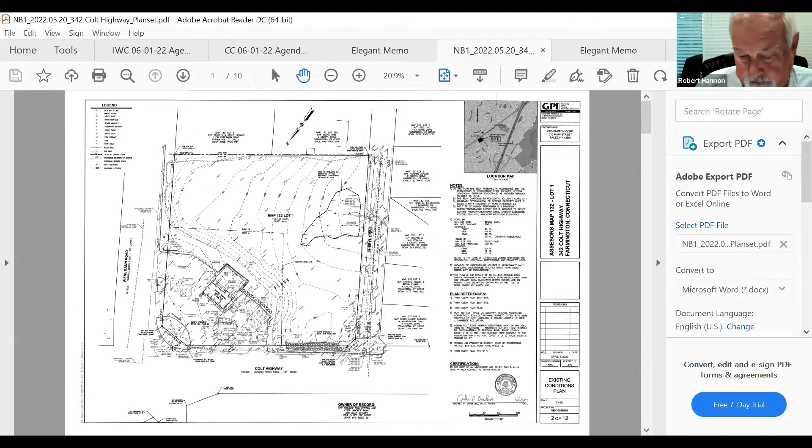All right, thank you. I know the engineer is online. Yep. Good evening, Mr. Chairman, members of the commission. For the record, Chris Tymula. I'm a senior project manager with Greenman-Pedersen, and our offices are at 44 Stiles Road in Salem, New Hampshire. First, I would like to apologize.

My understanding, based on some discussion with the team, was as long as we had everything essentially submitted to the town a week before the meeting, there wouldn't be any issues. The last thing I want to do is present any issues, so I do apologize for any inconvenience. So what I could do is just in general discuss some of the changes to the plans. As I'm sure everyone knows, the last time we were formally before this commission was April 20th.

We had the site walk on the following Saturday, April 30th. Identified some items along Cheryl Drive. Everything was staked out, the retaining wall, the building corners, et cetera. But the changes to the plans I'd like to discuss were really relative to Bruce's review letter, which was dated May 3rd. So if we could go to the grading plan, that gives the most up-to-date changes.

Yeah, thank you. So on this grading plan, first thing, over by the office building, we've added a gated access and gravel driveway to the right of the building. I know we had discussed maybe circumventing around the left-hand side and going around the back. Basically we shifted the retaining wall over about 10 feet, which allowed us to get the gated access in there and provide a 12-foot wide gravel access for maintenance to bioretention number 1.

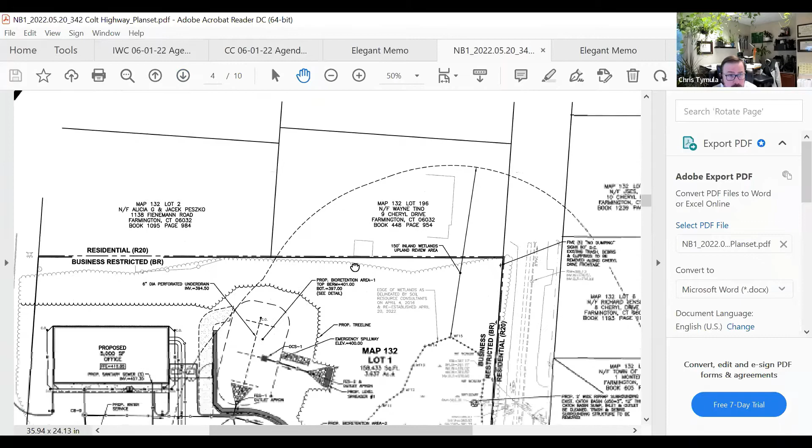We've added some straw wattles and silt fence along the lower development area, which was discussed at the site walk, as well as I believe in Bruce's comments. That would be on the next plan, I believe, the erosion control plan.

Yeah. So basically, go up one more. Right, basically in the middle of the screen, we note proposed sediment control fence and straw wattle. Yep, right there. In addition, based on the site walk, and which is noted on this plan as well as the other plans, in the upper right corner of the lot, we've added a note:

5 no dumping signs, 50 feet on center, along Cheryl Drive; existing trash, debris, clippings to be removed all along Cheryl Drive. So basically, we're calling out 5 signs along that frontage. As everyone's aware, based on the location of the outlet in the existing wetland, there's some trash, debris, sediment collecting in there. So we've shown a 2-foot wide riprap surrounding that catch basin. We've noted that the catch basin inlet, sump, and outlet are to be cleaned, and all the trash, debris, and surrounding sediment to be removed, outside of that catch basin itself.

Additionally, for headwall number 1 and flared end section number 2, there was some discussion on the site of maybe doing some sort of an energy dissipator or level spreader. So we've added level spreaders on both those outlets there. That'll further take the concentrated flow and spread it out and disperse it prior to discharging towards the wetland resource areas.

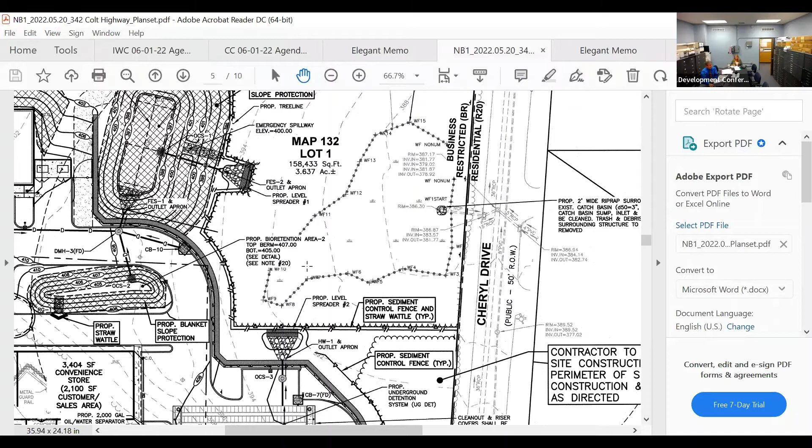Okay, so I guess we'll start. Do any of the commission members have any questions? Bobby? No, I'm fine right now. I'm just digesting everything. Okay, Dave?

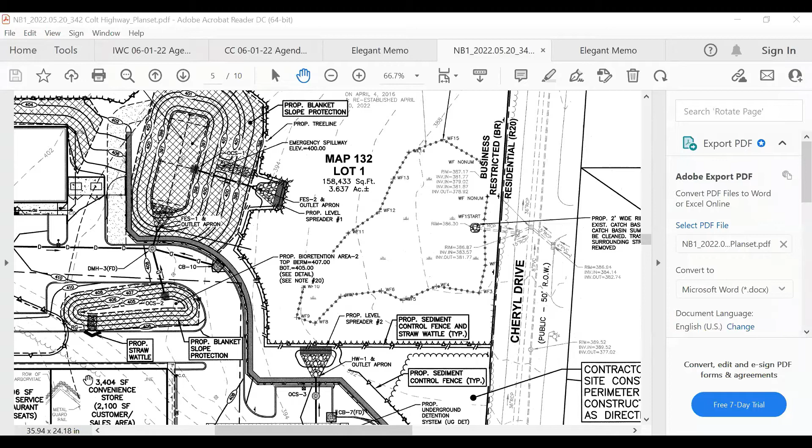Yeah, I had one question. It's actually one of the questions on the engineering review, asking about the feasibility of reusing the sanitary sewer. It was asked to review the feasibility of reusing it, but the response is just that this existing sewer service's condition and size is unknown and cannot be assumed to be reused. So it doesn't seem like any effort was made to actually review the feasibility.

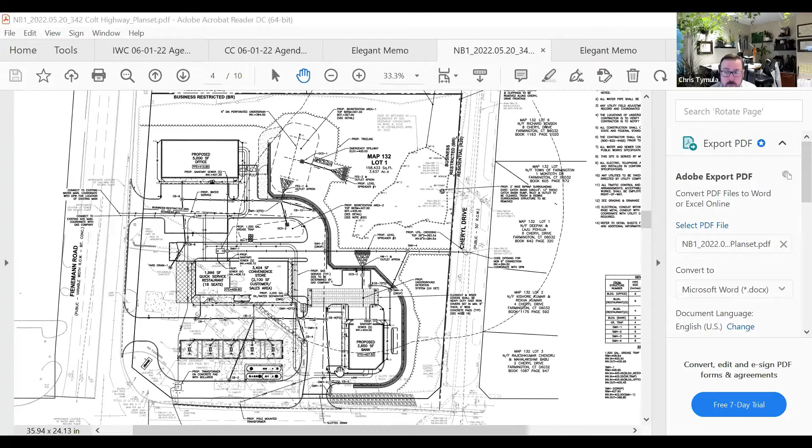Yeah, Mr. Chairman, I can respond to that as best possible. We did look into record plans of where that existing sewer was. We were unable to track any of that down. For the size of the existing facility compared to what we're proposing, the existing line, whether it goes to Cheryl or to Fienemann or somewhere else, is really unknown. So we felt the best approach was, since we need new sewer services for the bank and the office as well, to combine everything with that new line, so there won't be any issues down the road for condition and longevity of that sewer line. So we feel providing a new line rather than trying to reuse the existing line is still the correct approach.

Yeah, Chris, I have those notes. That was going to be part of my discussion, because it does come out of the existing building and run over to Cheryl Drive. So we have all those inspector notes from back then. Okay, sure. If we can have a discussion about that tomorrow or next week, we can look to see what we can do. Definitely. Yeah, that's all I had. Thank you. All right. Thanks, Dave. Robert?

I'll just note for the record that the applicant did a good job addressing all the concerns we raised during the meeting and the site walk: the maintenance and removing the existing debris, the addition of the no dumping signs, the correction of the outfall structure. So I think all of the concerns identified were addressed. The development is all within the upland review area, so it is generally compatible with our standards. Other concerns that may come up with this development likely fall under the Planning and Zoning Commission's purview. End of my comments. All right, thanks, Robert.

Neil? Nothing further to add. Thank you. Mark? No questions. All right, thanks. Ned? Yeah, I was curious about this proposed bioretention area 2.

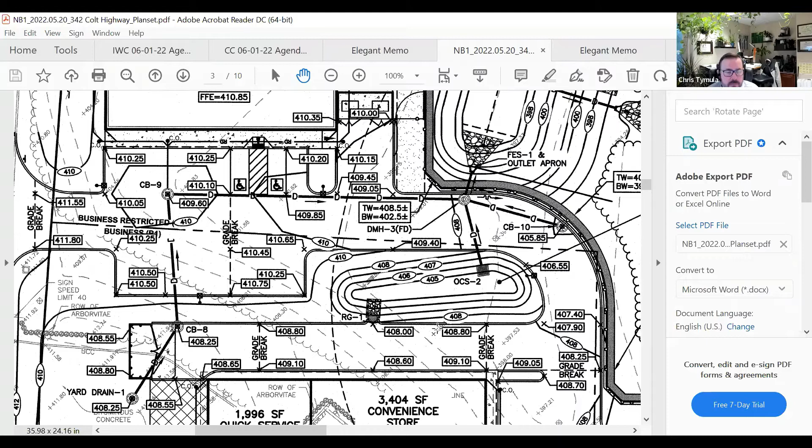Is that, I guess, the purpose of that, if it's going from one retention area to another retention area? Sure, and I can answer. So the intent of that bioretention area was to basically pick up the rear behind the convenience store, provide an additional level of treatment on site. The fact that it's basically discharging from one bioretention to the next bioretention, we do that fairly routinely. There will be a long-term operation and maintenance plan to make sure that the basin is cleaned frequently, making sure that there is no trash, no debris collecting in there. It is just essentially a shallow depression back there. So maintaining it and making sure that the litter and debris doesn't collect there really should not be an issue. Okay.

And then where are all the roof drains going on this? Yeah. So for the convenience store, all of the roof drains are draining to the front of the site, being collected in catch basin number 3. And then that ultimately goes to the underground stormwater system that is up. Yeah, correct. Right in there. Same thing for the bank. Everything for the bank is collecting into that same underground detention system. It's a watertight pipe system. So it'll basically hold the water and then discharge it out through the outlet control structure, and then the previously mentioned head wall number 1, which is slightly rotated.

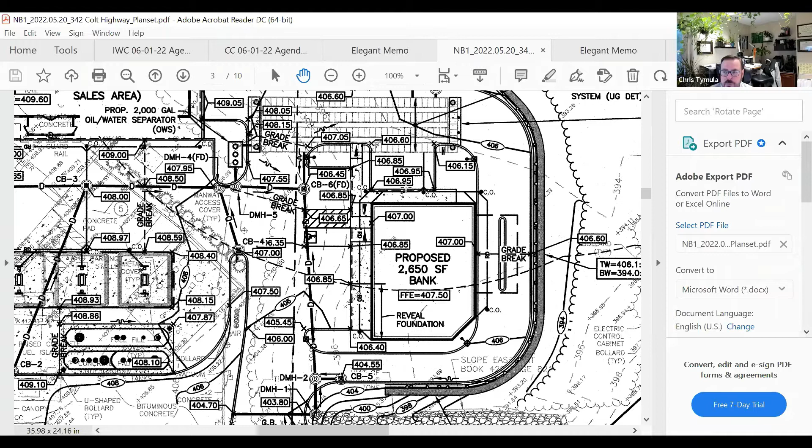And then the same thing for the office building. The office building will ultimately drain into catch basin number 9, which is located on the upper left-hand side. Okay, keep going. Yeah, no, hold on. This thing's giving me problems here. No problem. The pen is having problems, so I do it manually. There you go. So catch basin number 9 is right there, just located below the hand. That'll discharge into the bioretention number 1 as well. Okay. That's all I have.

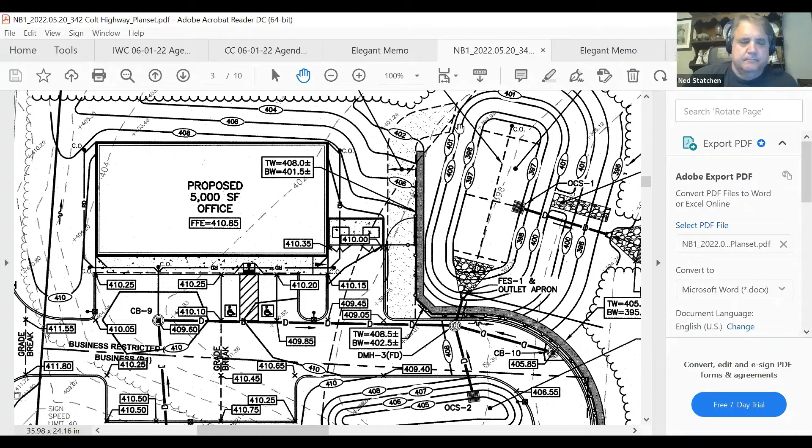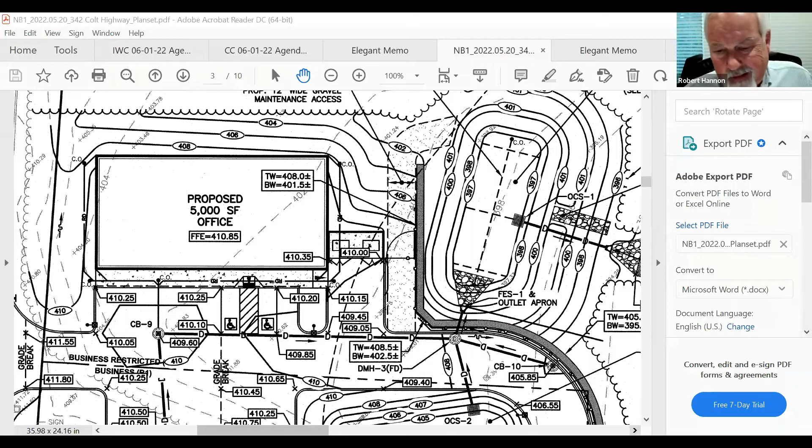Thank you. Thanks, Ned. I've got a couple questions to follow up with what Ned was talking about here. The drainage system going into basin number 1, is there anything special about that manhole? I mean, you've got some other equipment elsewhere, but I'm just wondering, is this a catch basin with the hood? I mean, what is it? Because I would think that because of a lot of the storm drainage coming in from the roadway over there, we might want to have something a little more effective as it relates to runoff from cars, things of that nature. So can you explain what you're proposing right there before it gets into basin number one? So catch basin number one or the bioretention area? No, bioretention basin number one. Sure.

So from a roadway point of view, none of the roadway system is getting into our drainage system. We basically created a high point at the property line to make sure that no roadway drainage goes into our site. The remainder of the driveway and the roofs for the office building, that's all going through deep sump hooded catch basins, First Defense hydrodynamic separators to make sure that all the oils and sediment are collected in there prior to discharging into the above ground bioretention basin. And then the bioretention area provides treatment, and then ultimately discharges out through the flared end and then the level spreader prior to getting to the wetlands.

So in that area, is there a hydrodynamic separator proposed there? There is. So DMH number 3, which is located right there. Yep. So if you look a little down to the left, it says DMH 3 and then FD. So the FD stands for First Defense. And then in our drainage structure table, we do denote that FD stands for a First Defense hydrodynamic separator or approved equal. Thank you. I appreciate that. Sure. In terms of the level spreader, you've got the design laid out for that on the plans? Yep. So we've added additional spot shots.

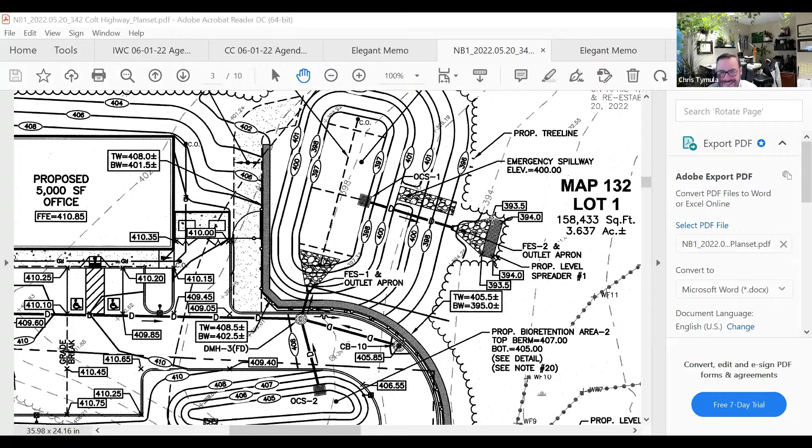Yeah, again, it's an issue that's come up with other meetings I've been involved in, so I just want to make sure that that's something that we address. Sure, and if you have no issue, I can work with Bruce and see what some other applicants have proposed in lieu. I didn't necessarily say it was specifically with wetlands, so. But yeah, no, that would be good.

And then Bruce, if you can go a little bit towards the right, I've got a question about the riprap design that's being proposed, like the 2-foot riprap around the pipe that's there. So my question really is, in terms of going out and double checking the site from a maintenance perspective, is this also picked up in any type of maintenance plan, and how often would that be done?

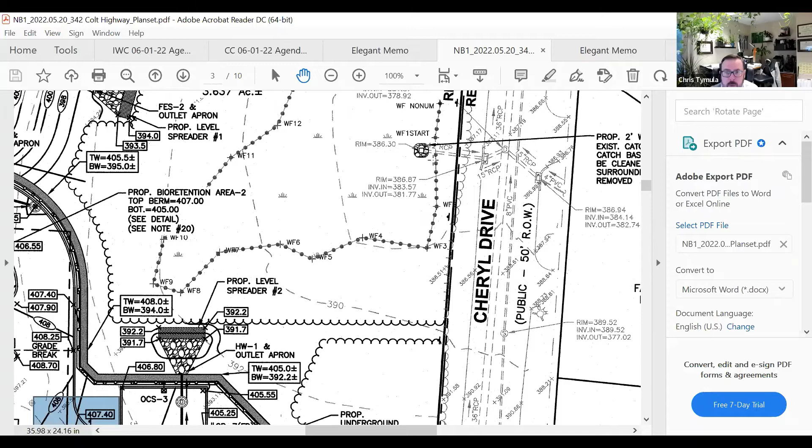Yeah, so specific to this catch basin, no, but we can definitely add specifics to the O&M to make sure that it is looked at. It could be generally looked at no different than a catch basin or an outlet control structure on site. We could just make sure that the O&M specifically talks about the catch basin outlet that's at Cheryl Drive, within the wetland system. It's sort of isolated from the rest of the site. Correct. So I just want to make sure it doesn't get lost in the shuffle.

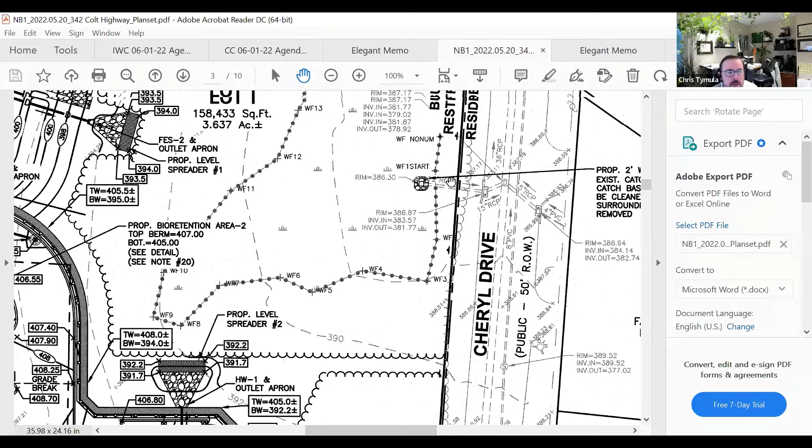And is that the only work that you need to do within the wetland area? Yeah, so basically get rid of some of the debris and trash that was surrounding that catch basin, clean that catch basin as well as the other catch basin that's in Cheryl Drive, making sure that the pipe is cleaned out. And then cleaning up the area along the lot line, making sure that the grass clippings and other garbage are cleaned up.

And the piping that's there is in good condition, so no work needs to be done there? It did not appear like that based on what I saw in the field. Okay. Once we get that cleaned out, we can make another determination at that point, because it's hard to see on this side. You couldn't even see the pipe. It was so plugged. Correct.

And then Bruce, if you can go to the area dealing with the underground infiltration. I'm assuming that there are some details in terms of the clean out, how frequently that would be looked at. Yep. And that's part of the O&M as well. Okay. And Chair, just so you know, this isn't underground infiltration, this is underground detention, because of the fuel. Chris and I had said that this should not be infiltration at this point, this should just be storage. So it's storage, and then it's slowly metered out through the pipe system.

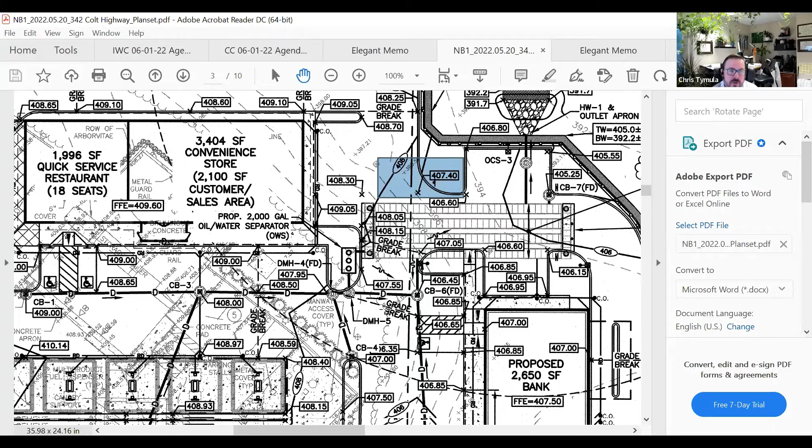Okay. And it should be noted as well that typically, for gas station developments, we try to go above and beyond, and we do specify that the pipes are watertight pipes and they meet a certain ASTM standard for water tightness. So in the event that there is a spill, which is obviously unlikely, we do have catch basins and oil water separators and all that. It just provides another level of protection to the surrounding areas by calling out the watertight pipes and joints.

Okay, no, I thank you. Those were sort of the questions that I had. Bruce, let me ask you, what's the status of the review? I'm going through the storm drainage now, so I'm almost through with the storm drainage. I've done the plans, I've marked them up, so I hopefully should be able to get this wrapped up tomorrow.

And then my plan was to talk to Chris verbally, work this stuff out so we don't have to go back and forth, and then hopefully get these items addressed or just noted on the plans as comments for condition of approval. Okay. I mean, like I said, my personal take is I would prefer to hold off until the next meeting because I know we've got until the 15th to do something, but I'd like you to have a chance to finish the review.

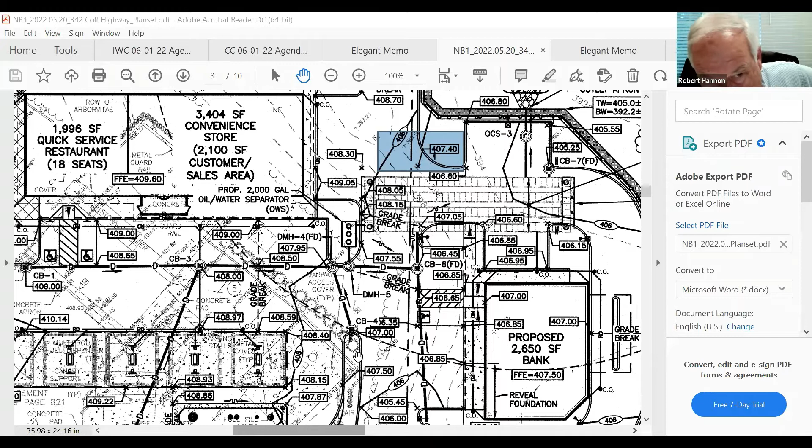If anybody else needs to chime in, if they have any comments or whatever, and give you a chance to talk to the applicant, and try to make sure that everybody's happy with what's going forward. That would be my take, but I'll open it up to other commission members to see what they think. If you feel as though we can vote on it now, that's fine. I'm just one vote. So Ned, I'll start with you.

No, I think it's reasonable. The town has to have time to review these things and work out any changes or improvements. And so I think to wait one meeting would be prudent.

I had a question on that catch basin that we were just talking about. If I remember right, that was very full, but then when we went to the catch basin on Cheryl Drive, we could see the pipe that was draining into it. So there was some moving water there, wasn't there? Correct. Yeah, it was flowing. It's plugged, but there's water seeping through. Okay. So the pipe's not completely plugged, but that catch basin, I'm sure once we get the catch basin cleared out, it'll be a big improvement. Yep. Okay, thank you.

All right. Thanks, Ned. Mark? I think we should wait until we get all the information. Thank you. Neil? Yeah, I agree. Let Bruce and staff finish their work and bring it back in a couple of weeks. Okay, thanks. Robert? I concur. The applicant didn't express that it would be a hardship if we didn't act for 2 more weeks. So I'd like to give the staff the time to review and make sure that everything is set. So I prefer to table. Okay, thanks. Dave? I'd agree with that as well. Okay, Bobby? Yeah, same here.

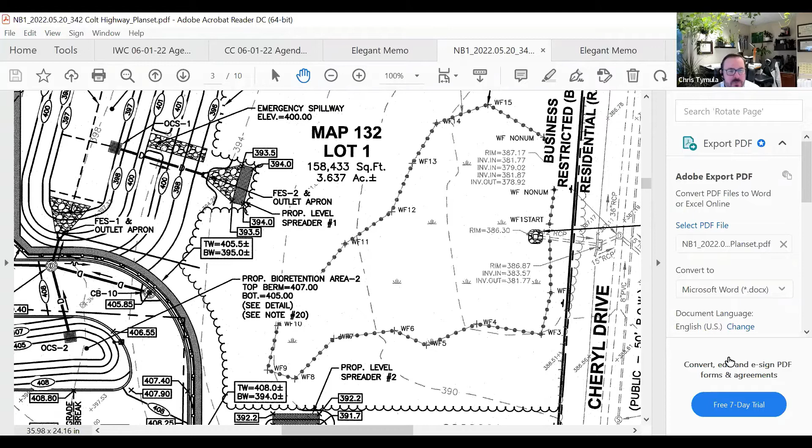Sure, and I guess the only thing I ask, Mr. Chairman, is I do have another meeting. The way it's working right now, it's every 2 weeks with this commission, every 4 weeks with another commission, and they land on the same day. So if I call in, I may be calling in with no video, on the road, from my other meeting. And that's no problem whatsoever as far as I'm concerned.

Okay. Again, we're just trying to make sure that the town has a chance to look at the changes. Everybody's happy with what's going on. If there's some issues the town has, it gives you an opportunity to try to figure out how to deal with it. And it just makes everybody's life a little bit easier. But if you've got to call in with no video, that's fine. So no, duly noted. I just want to let the commission be aware of that. That's all. Appreciate it. Bruce, did you have something? Nope, I'm good. Okay. All right.

So my only other question. So discuss possible enhancing of the level spreader outlet for scouring possibilities, and then making sure that we add the wetland catch basin to the O&M. Was there another item that you mentioned, Mr. Chairman?

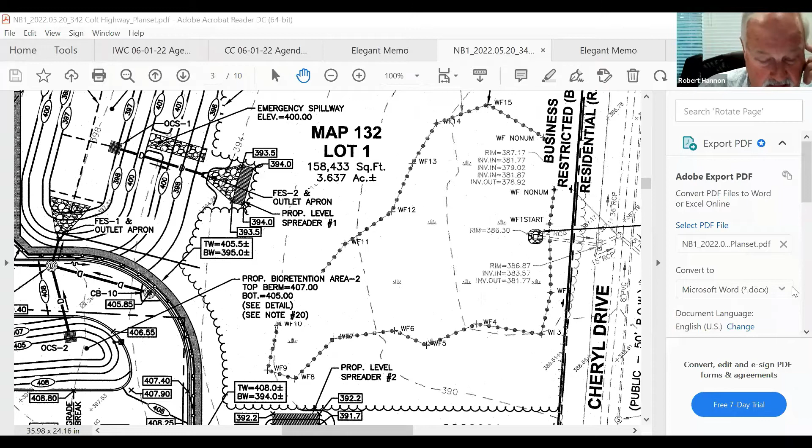No, you answered the other ones. I was wondering whether or not you had some of the hydrodynamic separators, especially over at Basin 1, and you said you did. So okay, that answers that. Oh well, the other one was maintenance in terms of the detention. Sure, yeah, that would be part of the O&M. Okay, that was what I had. All right, great, thank you.

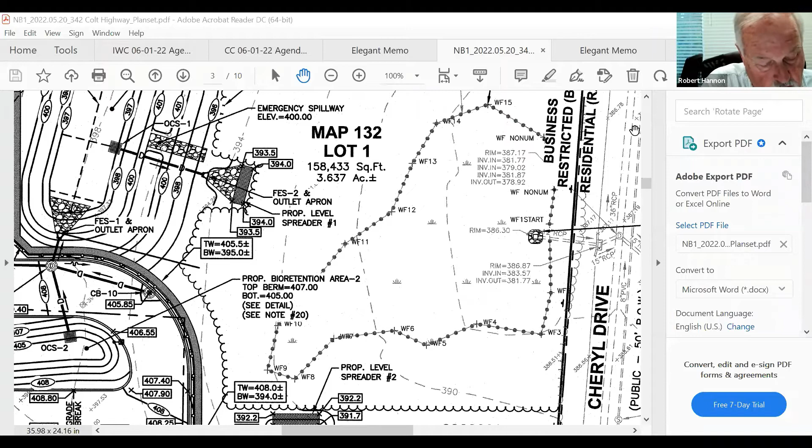Next up is Honeyman Builders LLC, 17 Burlington Road. We have the engineer online for that, just give me a minute. I've been having problems. We can't load everything at once, so I've been taking it a little slow. Give me 1 second. Here's the highlighted plan.

Dave, are you on? I am. Can you hear me? We can hear you. Loud and clear. Do you want me to jump into it, Bruce? Yeah, just take it from here and give a quick brief, because there were probably a couple people that were not on, and then bring it up to date with the changes and responses from the last meeting. Okay, thank you.

For the record, Dave Whitney, professional engineer representing Honeyman Builders. Mike Honeyman is also on this call if you have any questions for him. This property is 2.16 acres in the R20 zone on the south side of Burlington Road. As we discussed last time, the eastern 40% of the lot is wetlands, and there is a watercourse that meanders off the property, then back onto it, and then crosses under Burlington Road and flows to the north.

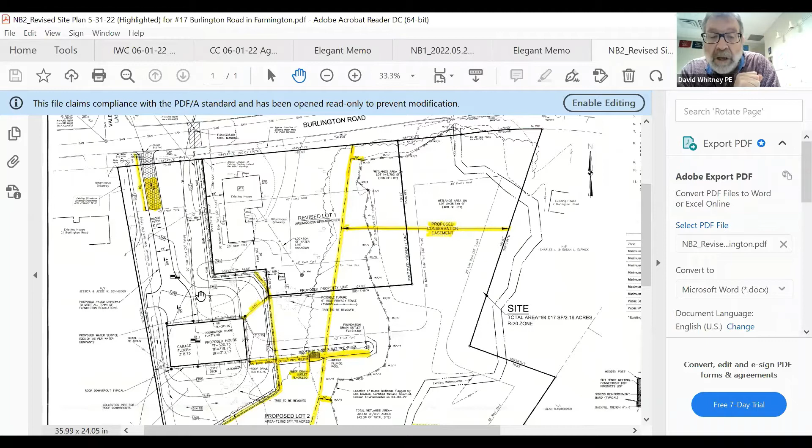There's an existing house and an existing driveway on the property. The project is basically a 2-lot re-subdivision to create one new single-family house, located right where Bruce has the cursor, somewhat behind the existing house. The existing house is connected to the sewer, and so will the proposed house. Public water is available, so there's no septic system. We've located the proposed house as far to the west, away from the wetlands, as possible.

There is a wood line that runs through the site, and our goal was to put the house in the open yard area so that very few trees would have to be cut down. There are two large specimen trees of questionable health that may or may not remain. Otherwise, no trees will be cut down as part of this two-lot re-subdivision. The roof water and the foundation drain outlet pipe will discharge easterly to the wetlands, right where Bruce has the cursor.

On the plan in front of you, the revisions from the last meeting based on the commission's feedback are highlighted in yellow. There are two outlet pipes. One is the foundation drain outlet pipe, with a very low flow. The other is from the roof drains. We originally had both outlets fairly close to the wetlands, but at the commission's request we pulled the roof drain outlet about 50 feet back. There'll still be a plunge pool and level spreader at the outlet, but it's about 50 feet from the wetlands now.

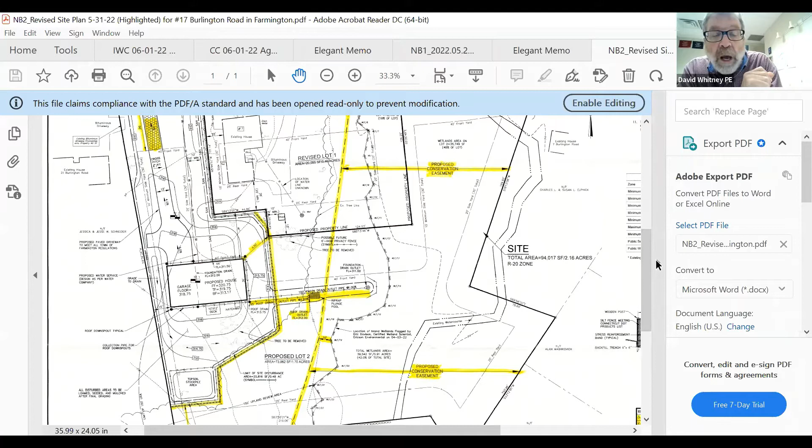Another revision: Bruce met with Mike Honeyman at the site recently, and they agreed upon the limits of a conservation easement, which runs through the site. Bruce has the cursor on it. This line has been established anywhere from 10 to 20 feet from the wetlands boundary and will protect the eastern portion of the site. We also added a second row of straw wattle to back up the silt fence at the limits of disturbance.

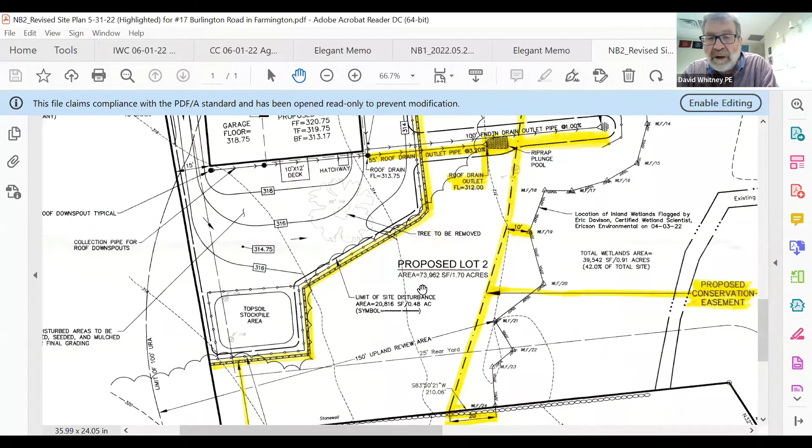Again, we tried to keep the disturbance as much as possible away from the wetlands. The driveway itself and related grading will be outside of the 150-foot upland review area, but the house itself and the grading around the house will be within the upland review area, but as far away as we could make it. The closest point of disturbance from the house and grading is 50 feet to the wetlands, right at the back left-hand corner of the house.

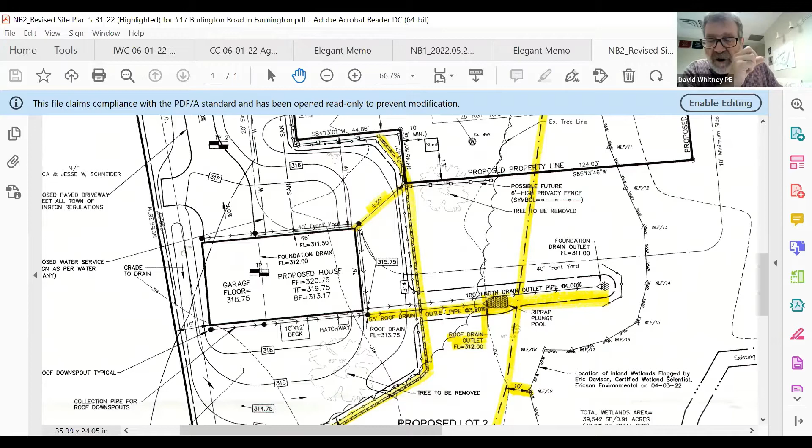The house itself is about 80 feet away at the closest point. The limit of disturbance is about 50 feet. So we made every effort to maintain the existing wooded buffer that is there. I enlarged the anti-tracking pad at the driveway entrance from 25 feet to 50 feet as Bruce requested.

I made a couple changes to a couple of numbers in the zoning data table. This plan went through a couple iterations. So the zoning data table, which is kind of a planning and zoning issue, now reflects the current surveyor's plan and the current site plan. I think that's basically it in terms of the changes. I'd be happy to answer any questions. Just so the commission knows, if this is approved, the next step is to go to TPZ for subdivision approval.

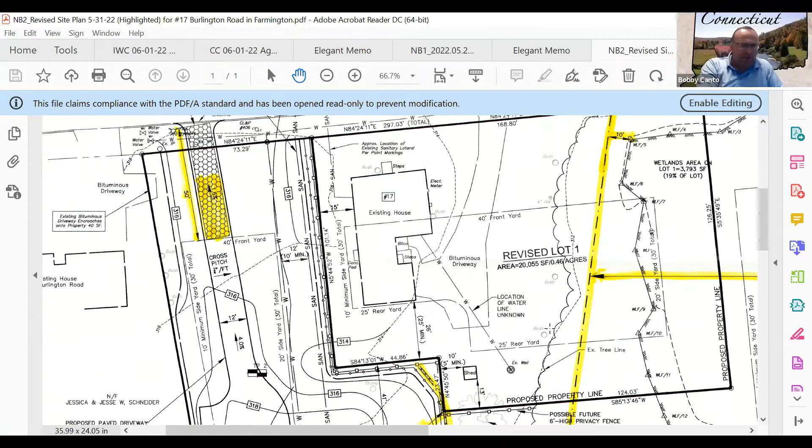Thanks, Bruce. Bobby, I'll start with you. Any questions, comments? So if I get this straight, they're putting two houses on, so it's gonna be two lots. Is it a common shared driveway? There's an existing house with its own driveway currently on the property at the front of the property. And you can see the proposed property line is sort of a rectangle around it. There is a bit of a jog, but that is the existing house lot.

So the remaining land, which will be 1.7 acres, about 5 times the minimum required, will be one new lot with one new house. And it'll have its own driveway, and the driveway itself is outside of the upland review area. Runoff from the driveway will flow across the grass and the open space, and eventually down through the woods and into the wetlands. But we've kept the driveway a fairly good distance away from the wetlands.

So the only thing going out of that rain leader is going to be the gutters from the house? Right, the gutters from the roof of the house and the foundation drain outlet pipe. We dug some test pits on the site, and there is a high seasonal water table down 3 or 4 feet. So that's the reason we're keeping the house up, because we want to avoid at all costs a wet basement. So there will be a foundation drain around the exterior of the footings, as is typical. And that pipe will outlet in an easterly direction towards the wetlands. Typically, very little flow comes out of a foundation drain outlet pipe.

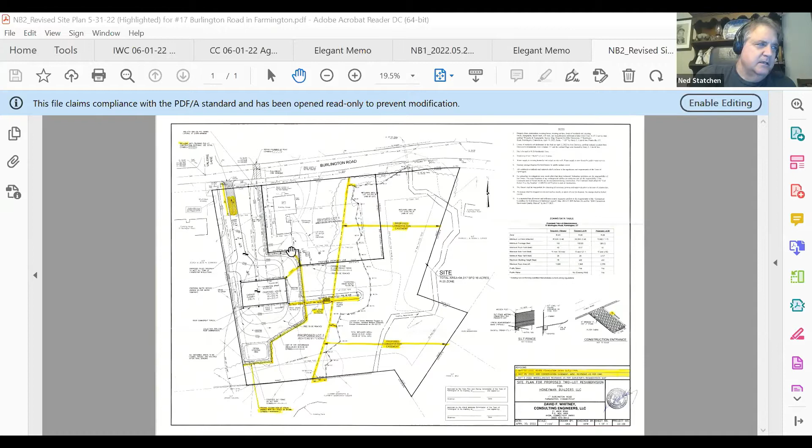Yeah, I'm definitely happy to see that the drainage moved farther away from the wetland. And I'm just curious, is part of the reason for this shape so the new house can have the required frontage? I can explain the jog in the rectangle, if that's your question. It does not have anything to do with frontage. It has to do with the desired location for the proposed house. We didn't want to cut down any trees, at least in the woods, but we wanted a decent backyard for the house.

And also, when we were on the site, it just seemed like the right spot for the house. So because there is a shed there in the back that we want to keep with the existing house, we came up with this configuration. The front of the new house has to be 40 feet back from the back property line of the existing house lot. And if we squared off the rectangle, which we could have done, that would push the house another 20 or so feet back, and it would have been very close to the wood line and also closer to the offsite pond that is to the south.

You can just see there's an existing pond off the property. So our thought was to not have the house any farther back than it had to be, so that we could stay as far away from the pond and the wetlands, and we could have a decent backyard without having to cut down any trees, and it just looked right on the lot where the house really wanted to be. So yes, it does make a slightly odd lot configuration, but you don't really see that when you're looking at the site. So anyway, that was our thought process.

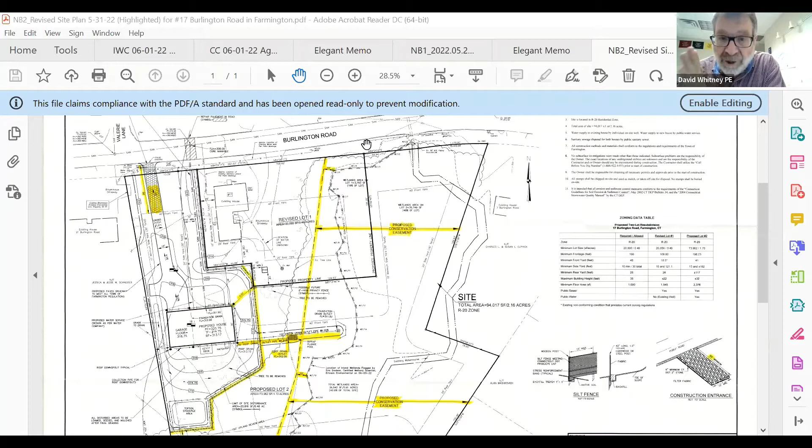Well, we didn't have 100 feet of frontage along Burlington Road where the proposed driveway is. So the minimum frontage is met on the eastern portion of lot 2, right where Bruce has the cursor. But we didn't want to bring the driveway in there. We could have moved the existing house lot all the way over and brought the new driveway in right next to the existing driveway, between the existing driveway and the wetlands. There was room to do that.

But it was thought that we could keep the driveway far from the wetlands, because I guess the dirtiest runoff is from roads and driveways. We thought if we could put the driveway on the west side and get our frontage on the right side, it does make for a lot that kind of looks like a ninja weapon, but it meets the zoning regulations, and I think accomplishes what we wanted to do, and that's keep everything as far from the wetlands as possible. Yes, I agree. I think that's a good idea. And I kind of had a feeling that you needed it to make up the frontage, but I wasn't sure.

And so now on the proposed conservation easement, is there going to be a marking in the fields for that? Are we going to require that? Yeah, we have our posts with the blue sign discs. The reason for the applicant and myself going out there was I wanted to confirm that this was a treed area. I wanted to make sure there were adequate trees in there and that we weren't just doing something where, if this does get cut, it would be open area to the wetland.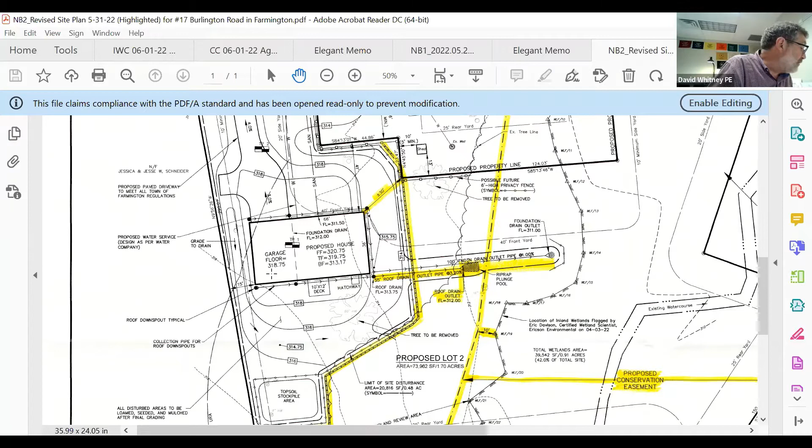As I said before, we conducted a couple of test pits, and the groundwater table is down 3 to 4 feet. So the basement floor, for example, is basically just about 1 foot in the ground at the eastern end of the house, and maybe 3 feet in the ground on the western end, and we're filling around the house. So we've kept the house up to stay out of the groundwater table. Also, hopefully, if this gets approved, construction will occur in the summer and fall and not during the seasonal wet time.

Okay, so is there an outside chance that when you're going in and putting in the footings you could possibly run into some groundwater? I guess what I'm looking at is, if that did in fact happen, even though it may be sort of a remote chance, is there something that can be done on the plan to at least identify, if you do run into that situation, how that water would be handled? If it's got to be pumped out in order to support the concrete footings?

Well, I think it's an unlikely event, but you can never say never. So we could construct a temporary sedimentation basin in the backyard and dewater the house. Again, we went to a lot of trouble to make sure that we're not going to be in the groundwater table. We didn't want to rely on a pump to keep the basement dry. I know theoretically that'll work, but that's not the best plan. So we started with the elevation of the basement and then went up from there.

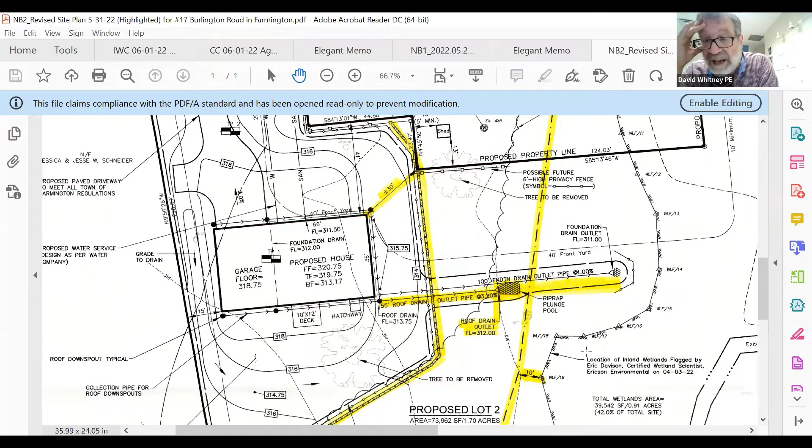So let me just double check. One nice thing, if I can just interrupt, one nice thing about this site is the grades are relatively flat. Sure. So you're not going to have much velocity from stormwater runoff. I think it's a great site for sedimentation and erosion control measures to work properly, of course, if they're properly installed. So we have that in our favor. Plus, as I said, the soils in the area of the house are well drained. So it's not a wet lot at all, at least on the western side.

All right. And then Bruce, a quick question for you. The way this is laid out, with the foundation drain going into the conservation easement area, we just need to make sure that the conservation easement is set up to allow the homeowner to be able to go in and do maintenance in that area, should it be required? Yep, that's required. Okay.

We did that on another subdivision. What we do is we work with the builder. We make sure that, look, we don't want to cut any trees in this conservation easement, so we just locate the foundation drain in an area that's not going to affect any trees. So hopefully, if they do have to maintain anything in the future, there won't be any trees they have to cut. Yeah, so I just want somebody to make sure they look at that, so that assuming this goes forward, the homeowner actually has the ability to go in and do some work there should they need to. Okay. Yep.

The only thing I have for you, one more thing, would be on the voting. Everybody was here last week with the exception of Commissioner Canto. So as long as he's reviewed everything from the last meeting and he confirms that, then he should be eligible to vote.

Okay, so Bobby, I'll ask you, how do you feel about it? Yeah, I'm not seeing a problem after reviewing it. I had the same problem with the foundation drain going so far in, but it seems like it's being addressed, so we should be good. Okay, and you're familiar with the material that you feel like you can vote on it? Yes. Okay, good. Just want that on the record, that's all.

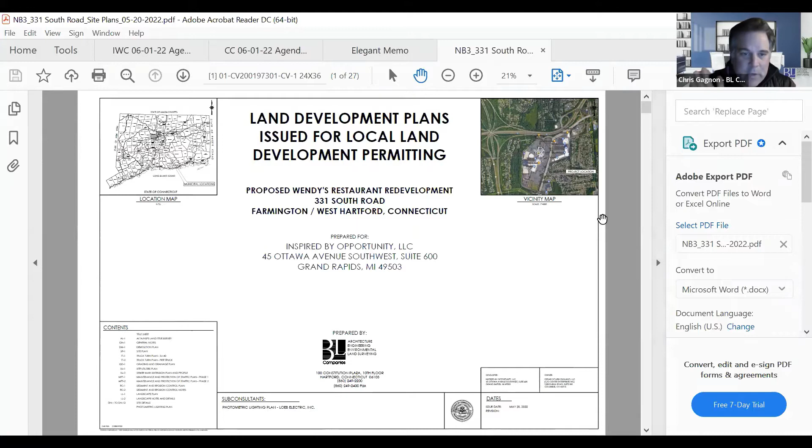Hello, everybody. My name is Chris Gagnon. I'm a professional engineer with BL Companies here representing this project for you today on 331 South Road. It's my understanding that there's been some preliminary application meetings with everyone, but I think this is the first somewhat formal presentation to you folks. So I will run through it, and certainly feel free to jump in and ask any questions. The interesting part about this project is that the property is located both in Farmington and in West Hartford. So we have two parcels, one property, if that makes sense to you.

So obviously we're in front of you folks today because there is a wetland area that is located off-site to the west of our property, right around there, that we have mapped out based on the town mapping that you have. We did not actually delineate it as it's off of our site, so we don't have permission to access that, but we have proceeded accordingly, assuming that wetlands is there, and that is why we are in front of you today.

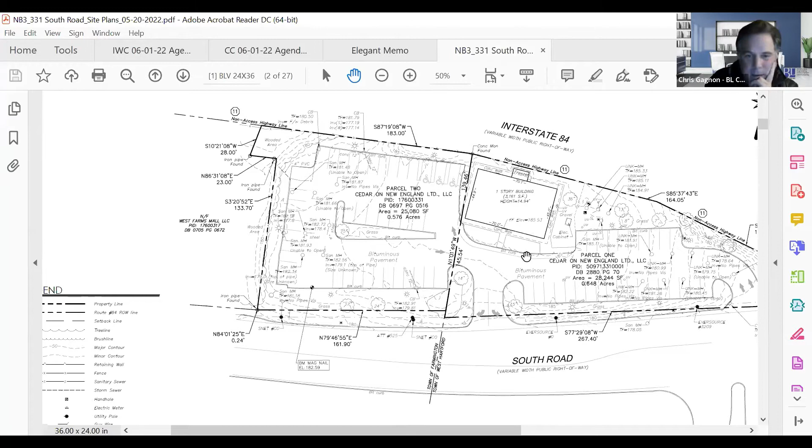So the plan here is we're going to take the existing building and, maybe can you click over to the site plan? Oops. Is that the plan you have? Yeah, no, that's fine. There we go. Beautiful. Thank you so much.

So I'll talk in general about what's happening, and then we'll get into the potential impacts and how we're mitigating them. So what we're trying to do here is we're going to demolish the existing building, and the plan is to install a proposed new restaurant, same tenant, but with a drive-through. There's not an existing drive-through on the existing project. So the plan is to demolish the building and build a new one. As we all know, drive-through is, I guess it's always been popular, but couldn't be more popular now.

The intent is to continue to use the same entry drive that we are using. This is a one-way flow situation, so it's one way in and one way out. We're maintaining the entrance location as it lines up well with the intersection across the street. So we're maintaining that, but we are proposing to relocate the exit westerly. It just allows for better flow for the drive-through, for the delivery vehicles, and for the fire vehicles. So that's kind of the site plan overview.

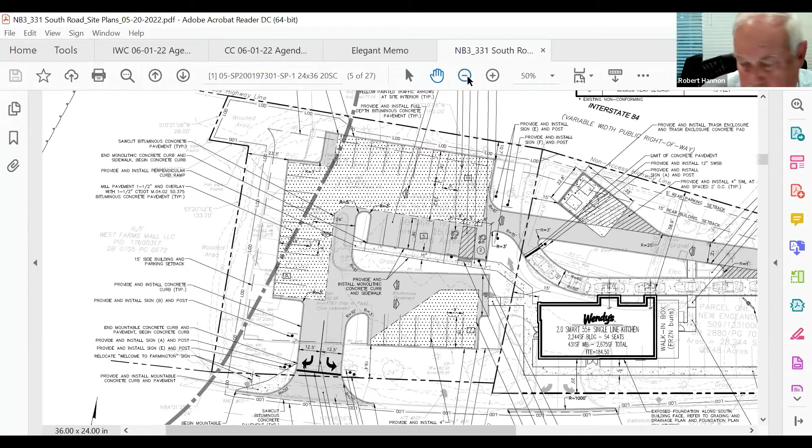So I guess before we go any further, any questions on the site plan, or happy to just save them for the end? Probably just save everything till the end. Thank you. Yep, understood. If you wouldn't mind then clicking over to the drainage plan. Let's see, what is that? Truck turn. Yep, don't need to do that. There we go. Perfect. And you could zoom in on that similar spot over there.

So somewhat of a theme of my presentation will be my opinion that these proposed improvements will actually be a benefit to the resource area off-site. So currently the stormwater is collected in a very simple catch basin and pipe system and is discharged at this same location. So our proposed development does not change the discharge location in any way. However, I believe it is an improved discharge in that we are proposing a hydrodynamic separator, which is that little circle. There you go. Which does provide the required TSS removal, and we're also installing deep sump catch basins where applicable with the hoods.

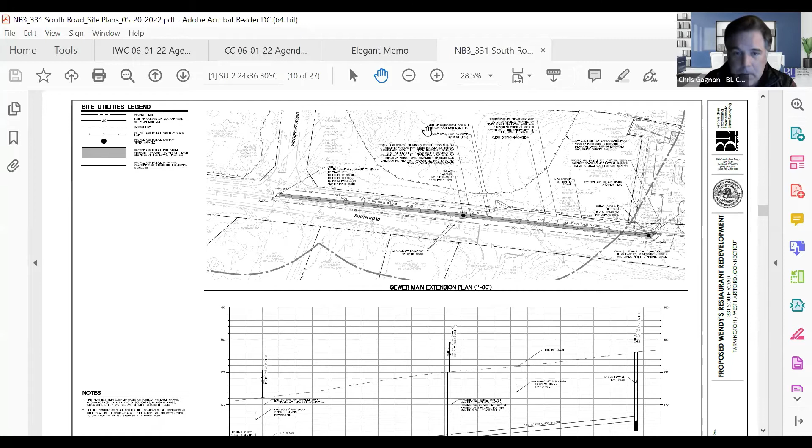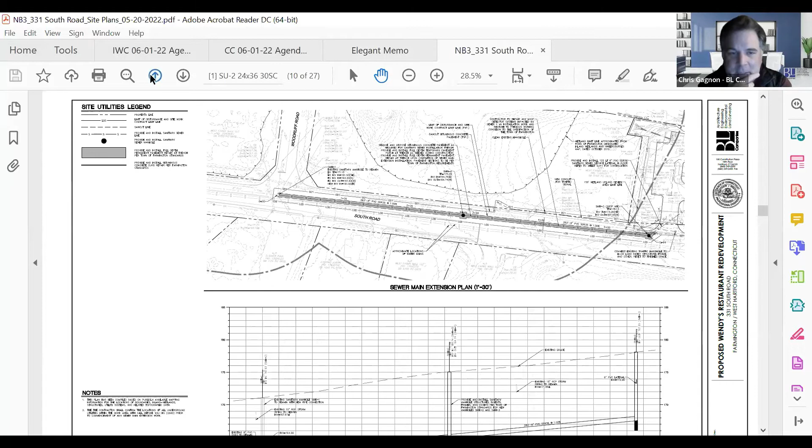Thank you. Ned, we'll start with you on this. Okay, yeah, I'm just confused. So that existing Wendy's has on-site septic system? Yes, it's currently served by a septic system. Oh. And you say you move the dumpsters further away from the wetlands? That is correct. They're right in the corner in the upland review area, and now they're all the way into West Hartford. All right.

And the main reason for this project is so that you can have a drive-through, which is a big business for a burger place, right? Yeah, drive-through and a modern building. But yes, drive-through is the impetus for sure. Okay.

I don't have any comments. The difference in pavement is actually lessened in the 150-foot upland review area. And a newer modern building, and the separators are included in the manholes. So I think it should be good. That's all I have. Okay, thank you. And Mark?

Yeah, upon review of this being an existing property, I think the impact to the area is going to be very minimal. So I have no further comments. Okay, thanks. Neil? Yeah, just two questions. One is, where is the current septic system and what happens to that as part of this project?

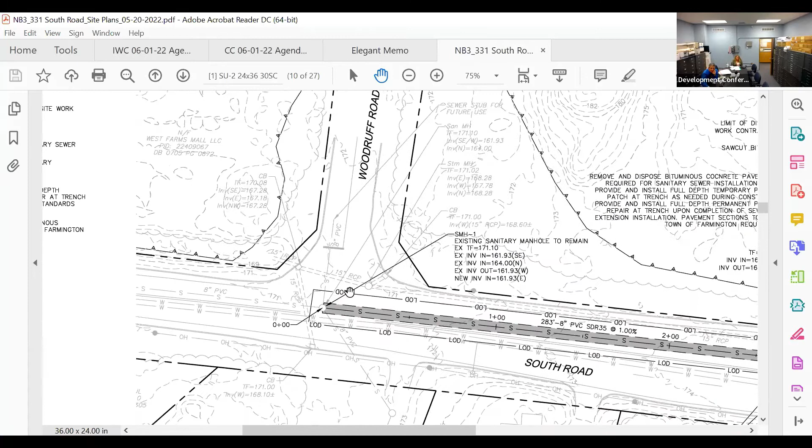Chris, if you don't mind me interjecting here, there are catch basins along that road, and these all dump into the wetland over here. So there will be a need for silt sacks and erosion control at all of your catch basins. And depending on what happens at this intersection, making sure that all these basins are properly protected. Understood. Happy to comply. Yeah, that comment's on the plans already. All right. Excellent. It's an appropriate recommendation. Happy to comply. Okay, that's it. Thank you. That was all I have.

Thank you, sir. Okay, Bobby? Just for clarification, because I'm not too familiar with it, when you abandon the septic tank and leaching fields and remove all that soil, what is going to go in place to fill back in? That's question one. And number two, are you changing site lighting? Are you going to be into the 100-foot area for trenching for the site lighting?

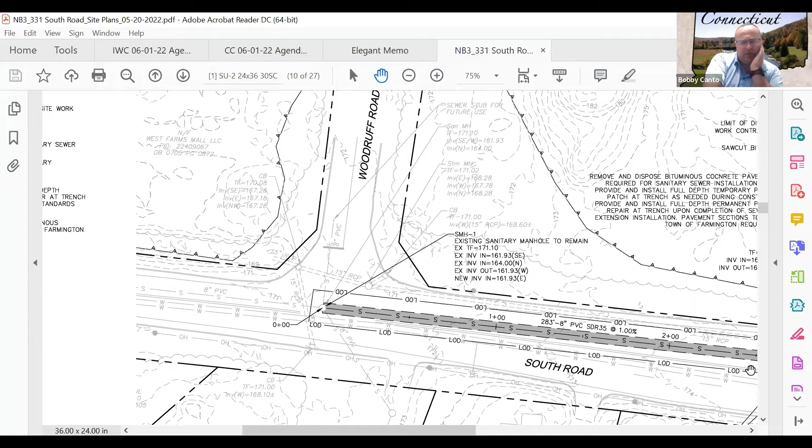Since we're pulling pavement away from there, if we were ever in the upland review area, it would be in an already disturbed area. I don't know if we have designed the conduits yet, but it's my understanding we don't have any proposed poles in the upland review area. So if there's no poles in the upland review area, there won't be any need for trenching in that area as well.

Okay, and for the septic tank and reinstallation or fill in? Yeah, that's just bring in some clean fill. Yeah, the D boxes would come out, the leaching chambers would come out. Some items can be abandoned in place and just filled.

So, you know, this system has got the leaching chambers. So those can be abandoned in place because once the effluent stops being discharged, there's nothing else going to it, but it will be disconnected and where appropriate backfilled. But it would just be a clean fill, and there also wouldn't need to be any disposal of any sort of soils if you are abandoning in place.

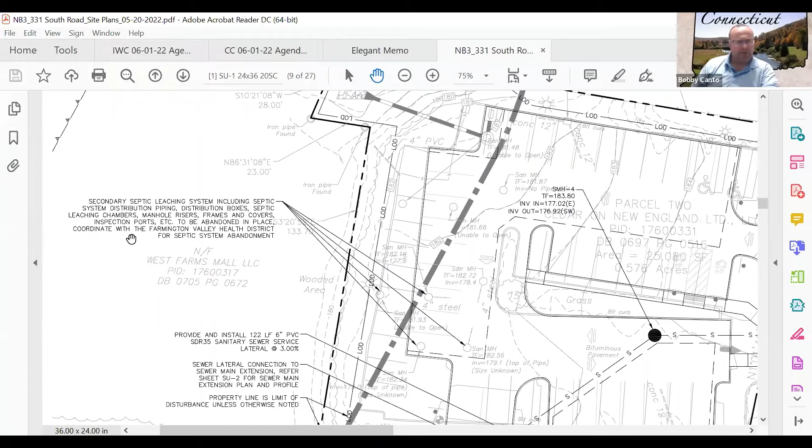Okay, and do we have an oil water separator in place, or are we using existing? For the sanitary system for all restaurants, there will be a grease trap. And then for the stormwater management, we're proposing a hydrodynamic separator, which is for suspended solids. So we don't necessarily have what I would define as an oil water separator, but we have a water quality unit that's designed to remove the suspended solids from the runoff. Okay, I'm all set then.

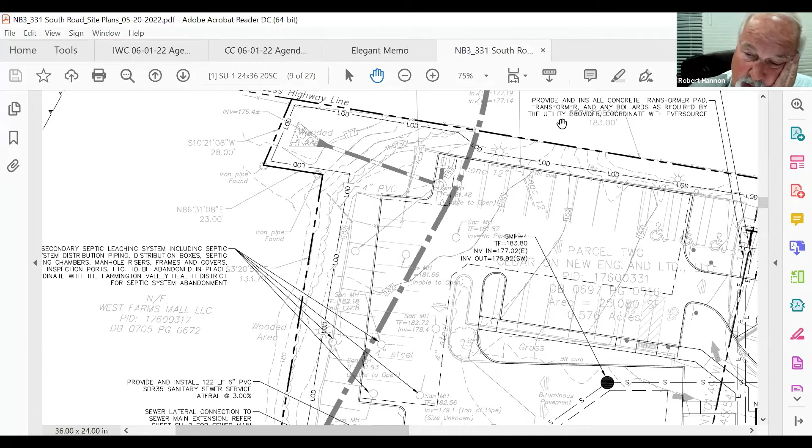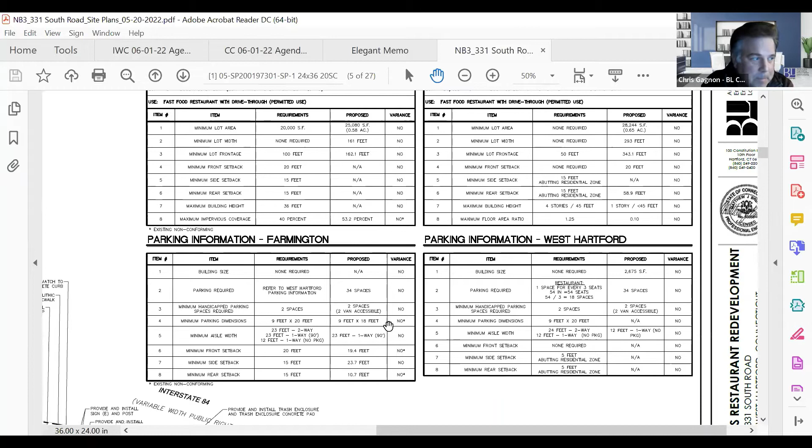All right, thanks, Bobby. I've got sort of, I guess, a crazy question. The parking spaces, are they based on West Hartford or Farmington standards to come up with the number of parking spaces you have? It's my understanding that we're trying to mimic existing conditions in terms of the parking on both sides. But because the building is located in West Hartford, that was the driver. On the sheet, you'll see they broke out the parking information, Farmington's requirements and then West Hartford's requirements. So taking those two together, that's how they came up with the total number of spaces.

Yeah, and I was just curious because I was wondering if there was a way to even reduce the number of parking spaces that are proposed. But that's why I was asking whose regulations you're following. It's always fun when you're dealing with two different municipalities.

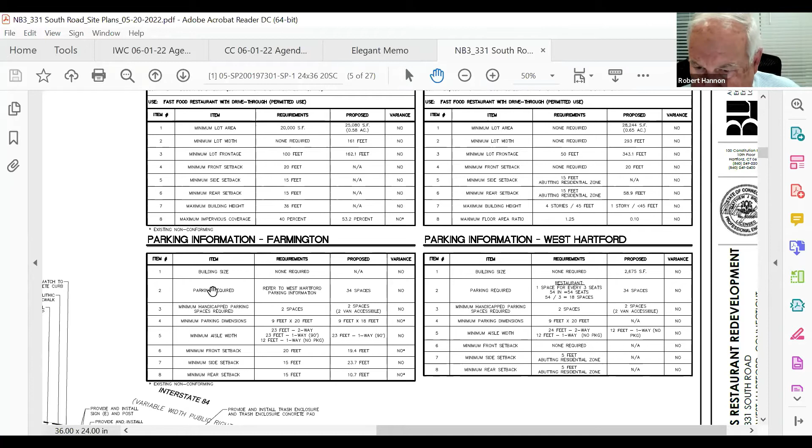The other question I have is, I'm assuming that somewhere there is a maintenance plan for dealing with the stormwater. Yeah, as part of this stormwater report, there's a maintenance plan because you will need to maintain the infiltrators and the hydrodynamic separators. So they're standard. There's an operation and maintenance plan that will be filed that needs to be followed by the operator. Okay, and then I'm assuming that would also tie in with some of the other basins that also have the deep sumps with hoods, because if they're going to do some of the maintenance, they may want to go in and start vacuuming out whatever collects in those as well. So, okay, that's all I have.

Yeah, our calculations rely on appropriate housekeeping, between cleaning the parking lots, vacuuming out the sumps, and proper maintenance of the hydrodynamic separators. None of it works if you don't take care of it, just like our houses. Yep. All right, thank you.

I guess at this point, unless anybody else has any other questions, I'd like to get a motion to accept the application. So moved by Robert. Is there a second? Second, Mark. We have a motion on the floor to accept the application. All those in favor, please signify by saying aye. Aye. Aye. Okay, so we will accept the application.

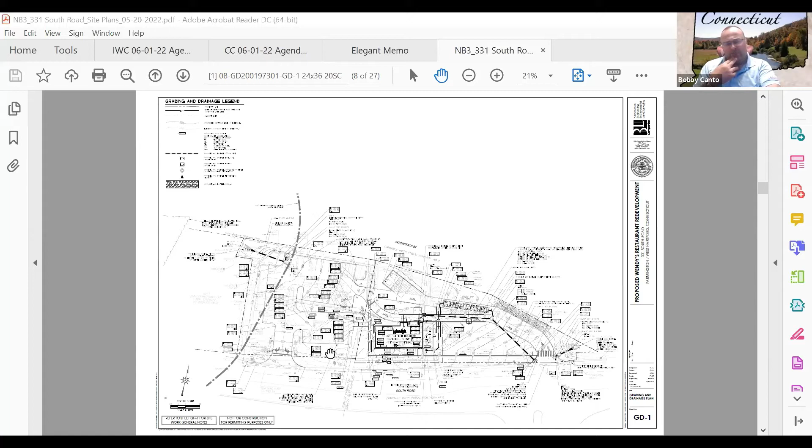Dave? I'm sorry, Bobby, were you done on that? Yeah, I'm done. Like I said, I had seen enough at the walkthrough and reviewed the materials where I think they put some effort into making sure everything's protected.

Okay, thank you. Dave? I guess overall, I think it's kind of a difficult project to judge. There's pretty extensive development within our 150-foot regulated area, more so than most projects that we've seen. The 25-foot buffer is smaller than most projects that we've seen as well. However, there's a whole lot of open space to protect wetlands and adjacent uplands. So you have to kind of weigh those two items against each other, I think. Somewhat concerned about the vernal pool too.

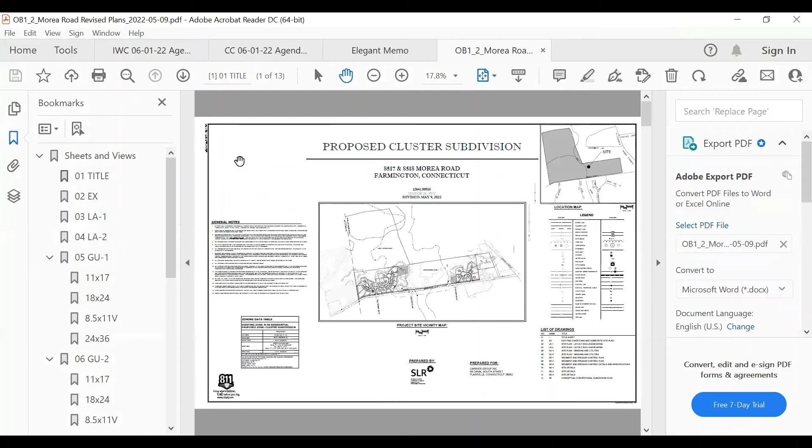I'm not sure if I can even ask this question, but when I was looking at the plans, the vernal pool seems to be much smaller as it's depicted than the 4,000 square feet that was talked about. So I don't know how to pursue that. So Dave, if I understand, you're saying you think the vernal pool might be smaller than what was depicted in the discussions? No, the vernal pool that's shown on the plans seems to be considerably smaller. If you go to, I guess, the third or the fourth sheet on this one. Yeah, that's it. Okay. I just wanted to make sure I understood.

Yeah, the vernal pool here, I don't have the scale, but the buffer is 25 feet. And so this looks like about the size of the buffer. So if it was a 25-foot square, that would only be 600 square feet. And even if it's a little bit bigger, if it's a 30-foot square, that's 900 square feet. But the narrative talks about 3,000 and then 4,000. My concern is that if the vernal pool is bigger, the 100-foot envelope will be bigger as well.

Okay, so just so I understand, you feel as though if the vernal pool is larger based on some of the narrative language that's being used, then that may have an impact on where the 100-foot envelope goes. Correct. Okay. It's just a question. I don't know if we need to do anything about it now that the hearing is closed. I mean, I can't answer. I don't know because I didn't go back and measure it.

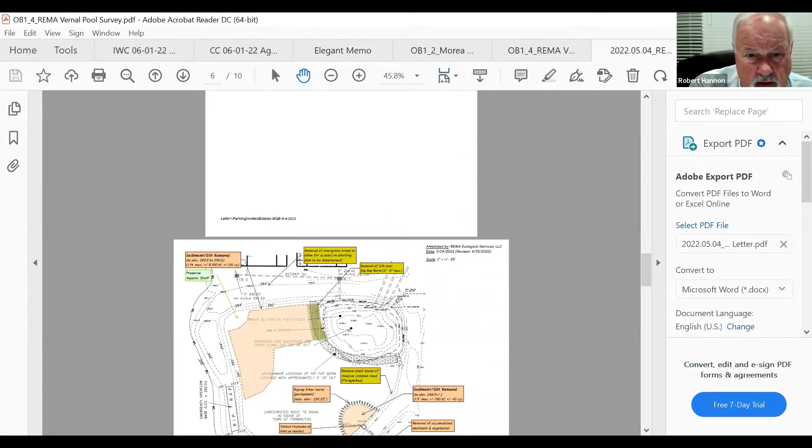Let's see here. Yeah, page 2 of that document that you have open now says 3,500 square feet. I think that was his first. Looking to see if we had something, a sketch or something. Was it page 2, Dave, or? This is the other document. No, that's the wrong one. Page 2 of the May 4th. Yeah, it said it there, it's under survey results. Right, 3,500 at the top, and then the paragraph there, approximately 4,000 square feet.

So then is your question, Dave, whether or not the 100-foot envelope is accurately reflected? That's right. It doesn't seem like it could be. Excuse me, Bruce, do we have anything on the other plans which identify a larger area? Because, again, if it's 25 by 25, if that's what they're showing, then we're losing close to 60% of what the outline of the vernal pool would be. And that's also important in terms of which way it would be directed. Is it more towards the lots? Is it more towards the road? Is it more towards the northeast?

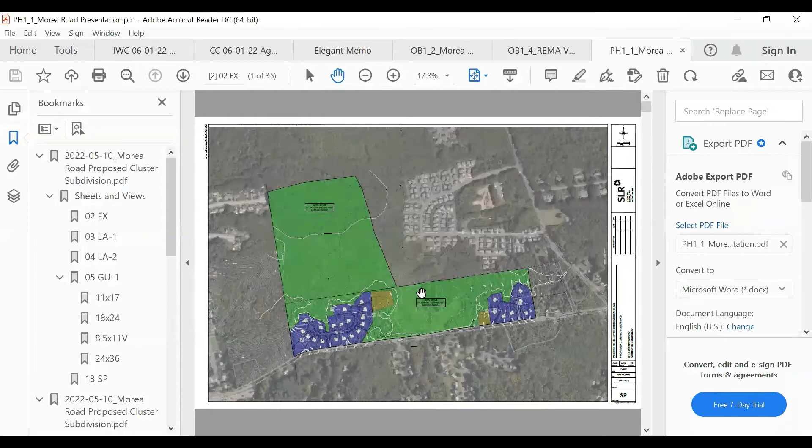This is like 600 or 700 square feet. It's 1/6 of the size it's supposed to be. Checking some different things here. There we go. What's this one here? That looks a lot bigger. Yeah. Okay. Well, the hexagon or the pentagon is embedded in that green. So what's the green around it? That's what I'm gonna find out right now. Just give me a second. That's the presentation. Give me a second here, March 21st.

So yeah, that looks like it's the right size. And there's a green handwritten circle, which must be the area, right? That's the new one. Okay. Well, I guess that answers my question. I don't remember seeing this on any of the documents that we reviewed. This was part of the applicant's presentation documents. Oh, okay. So that's what this is from. The green is a new 100-foot envelope, I'm assuming. That's what Shannon said. It's a new 100-foot envelope.

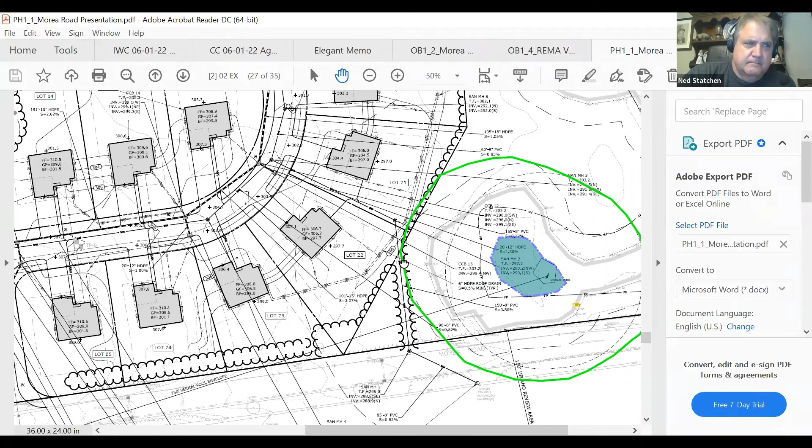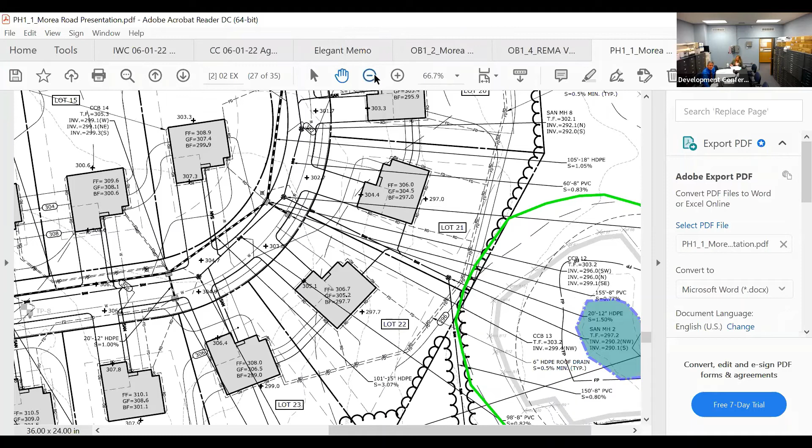Because that's 150 feet there. So that's got to be the 100-foot envelope. Yeah, because it's not changing much if you look at the northeast side of it. Yeah, exactly. Okay. But does that help you, Dave? Yes, that answers my question. So this is the true representation on the plan. I just hadn't had a chance to see that. Thanks for finding that, Bruce. I've got a little birdie in the back of my head reminding me of this one. So yeah, I think that's it. And as you can see, it does just skirt the property line. Okay, all right, thank you for picking that up.

Thanks, Dave. Robert? Just on the procedural front, Bruce, thanks for raising that there was the request to introduce information after the close of the hearing, which wouldn't be appropriate. We can seek clarification on items that were raised during the hearing, but to introduce new information would be unusual. And I would agree that Commissioner Canto can fully discuss matters, but voting members is where we differentiate. It was appropriate to have the conversation we just did on the vernal pool, because that clearly is a very critical ecosystem that we're going to have to evaluate.

In general, I think the balance is right. The trade-off that we get with the cluster subdivision is we have a more intensely developed area, but lots of open space. I want more time to go back through and look at the final documents more closely, but I'm clearly leaning towards the draft motion to approve that reflects the dialogue we've had to date. End of my comments. All right, thanks, Robert. Neil? Yeah, I agree. I went through the motions tonight and I'm leaning towards the approved motion as well. I just want to make sure we have all the caveats and considerations in that document.

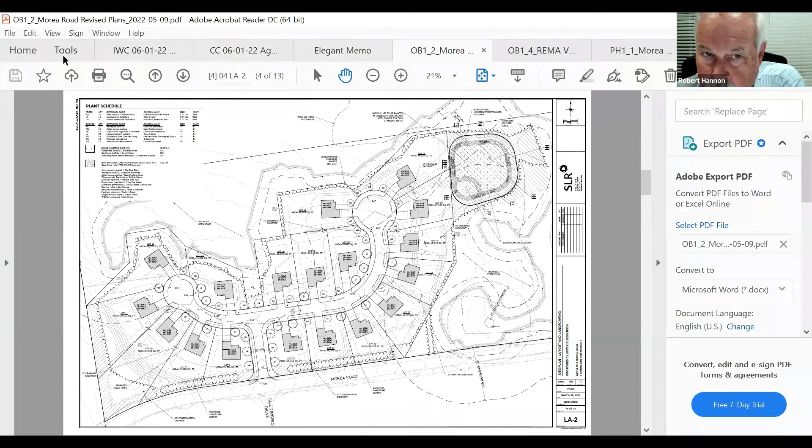Bruce, I have a question I'm trying to get straight in my mind, because I'm looking at the letter from DEEP regarding the Natural Diversity Database Determination. They talk about your placement of the development, confining it to 13.5 acres of the 45-acre lot. Is that the lot that is strictly along Morea? Because then there's the other piece, north of this part of the development we're looking at, that was also open space. I'm just trying to make sure I understand how much open space we're talking about in the entire area.

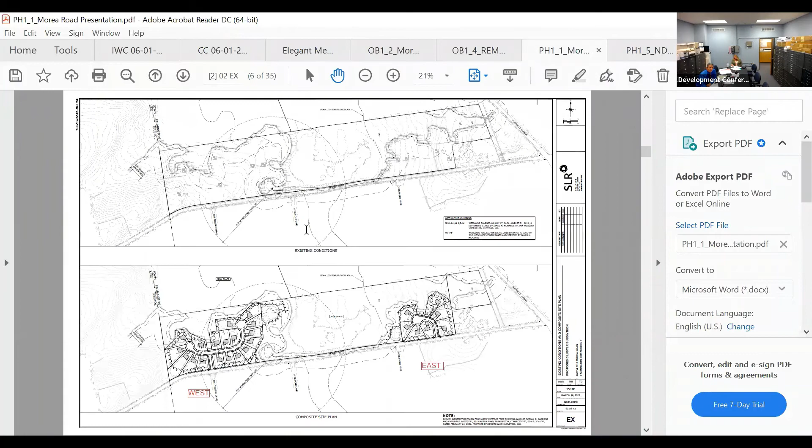All right, so "we concur with your plan to set aside the 42 acres." That's lot 8817. Let me go back to which map that was. Here we go. Give me a second. You may have had it on that one you just skipped past. What are you looking for? No, I'm just trying to show them which one. I thought we had a map that showed the lot numbers. But this is 8817 here, and this is 8818.

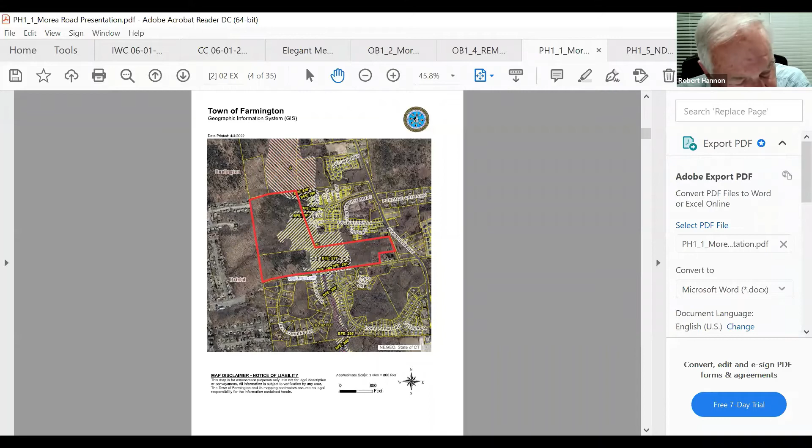So what they're talking about is preserving this piece here, and as we said, there's additional open space of this property that'll be turned over to the town as well. Right, so I'm just trying to verify that with the DEEP letter. I think they're just talking about the property that fronts on Morea, not that northern piece, correct? Well, in here we agreed to set aside 42 acres donated to the town of Farmington as open space. That's what she's talking about, that piece. Right.

Okay, and then your placement for development, confining it to 13 and a half acres of the other 45 acres. Okay, right. So ultimately, we're talking about roughly developing about 13 and a half acres out of 87 acres, correct? Yes. And the property at 8517, all of that open space is being proposed to be deeded to the town? That is correct. Sorry, give me a second here. I'm zooming in. Or will it be a conservation easement?

No, they're proposing the 8517, which is that corner upper, I'll call it that northern lot, to be fully donated. Go back to this. Sorry, I was opening up something else while we were talking. Where's this presentation? Here we go. So this would be deeded over to the town of Farmington, as well as the open space in here. And I don't know if it shows clearly on any of these plans. Because here's the development here, and then there was other open space in here as well.

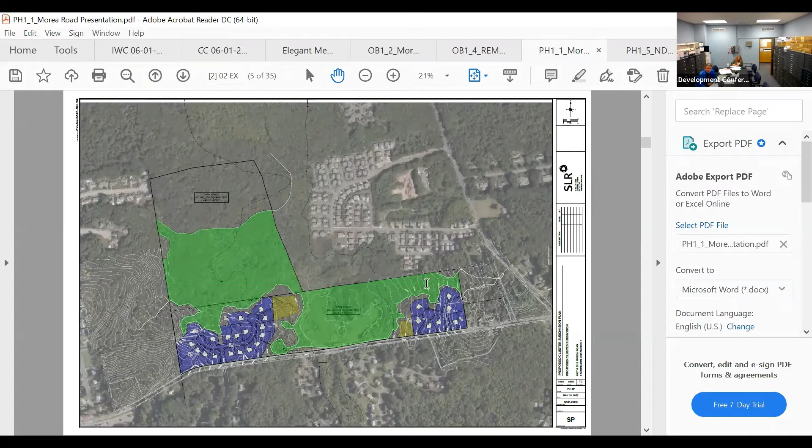Okay, so it would be a total of this property as well as an additional, what is that, 13 acres or so? Or no, sorry, I apologize. There we go. So the 42 acres on that upper piece, and then confining the 13 and a half acres to the 45 acres. So about 32, right? Yeah, exactly. Okay, I just wanted to make sure that I was clear on that. Now that helps.

Thank you. One of the things that I did not see, and may not be part of the record, is that if this does go forward, I would think the conditions for development as outlined in the DEEP Natural Diversity Database letter should be included on the plans. But in general, I've thought about this, and I'm probably leaning in favor of it. One of the primary issues that I had is the areas around the vernal pool and the impact there.

But what's interesting is that of the two species identified at the vernal pool, neither one is identified as a threatened or endangered species. So we're dealing with the turtles in particular, and the fencing can be set up to control that. There didn't appear to be any sightings in that area, though there may be further north in that watershed area. But again, what it boils down to for me is using a cluster subdivision to promote an expansion of open space conservation area. I think that's the trade-off.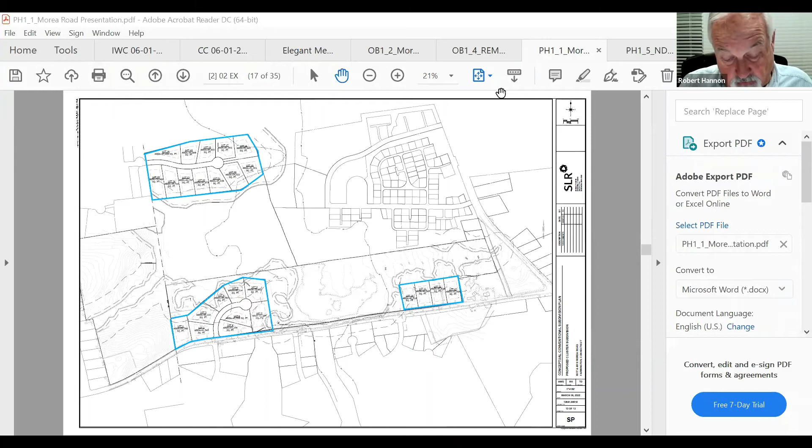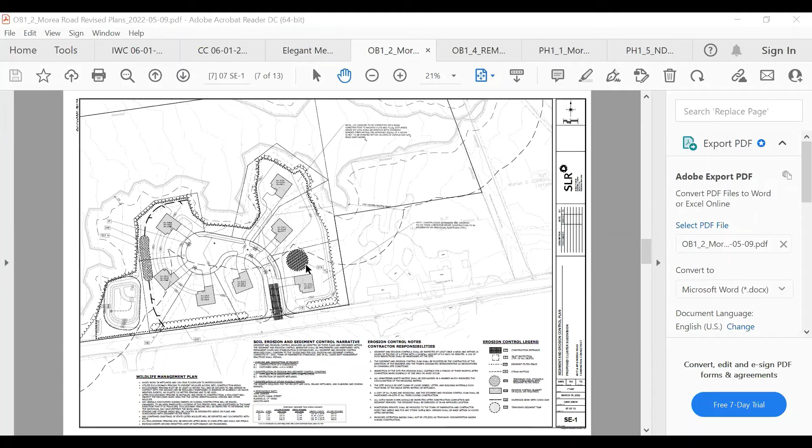Mr. Chair? Yeah, this is Dave. Yep. All of the NDDB plan is a note on one of these maps. It's page 7, 7 of 13. It's on the same set of plans that we had been looking at previously, the 509 revision. Oh, sorry. Yeah, you can see it in the lower left there. Wildlife management plan. That's pretty much verbatim what the NDDB had recommended.

But then do you still want this added in the motion as a little extra safety measure? I do. Okay. I mean, if we add that, I would reference the NDDB letter dated April 22nd, 2022. All right. I thought I had that in there, but yep. Unfortunately, sometimes you can have some really good information on the plans, but if a contractor decides not to read the plans, I just want to make sure that this gets addressed should we go forward with it. But thanks, Dave.

So I would say at this point in time, I'm thinking that they bring this up for a vote at the next meeting. So folks, think about how you feel on it. If you have any other concerns, if you feel like you want to vote to approve or vote to deny, what some of the rationale is. The draft is prepared by staff. Is that sufficient? Do we need to add anything? And again, we'll maybe shoot for the next meeting, see what we can do at that point in time. And if we need some additional time, we'll need to get an extension. That sound like a reasonable approach to folks? Sure. Yes.

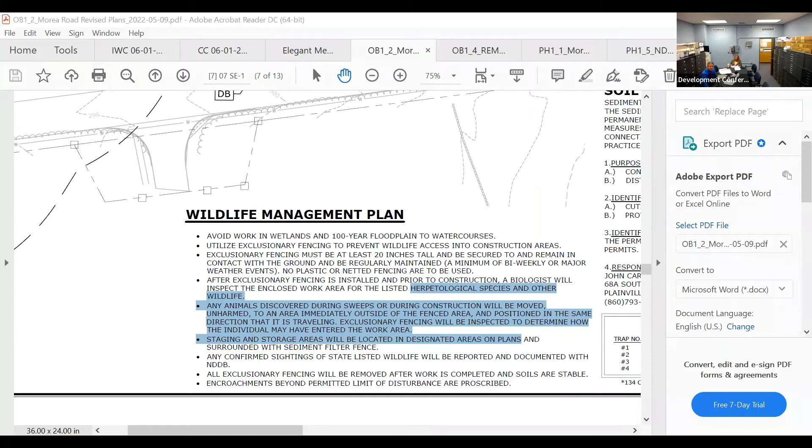Hi, everyone. Just real quick on Morea Road too. If anyone has questions similar to what Dave had as you're going through documentation, you need us to look anything up, you can feel free to email us. Don't email the whole group, but you can email us and then we'll get the answers and get it redistributed so everybody gets the same information. We're happy to clarify anything. So as you're going through things, if questions pop up, we're happy to help with that.

And then, as Bruce mentioned, the decision came back from the courts regarding the appeal for 402 that was emailed out to all of you late this afternoon. I've read through it and we've chatted with Bob DiCrescenzo. Basically, the courts dismissed all of the claims in the appeal except one related to feasible and prudent alternative with respect to some wording in the town's regulation. Our regulations are a mix of having the model reg prepared by DEEP, and then some word tweaks to it. So it doesn't align exactly with the suggested reg from DEEP, and it seems to have tripped us up a little bit in this instance.

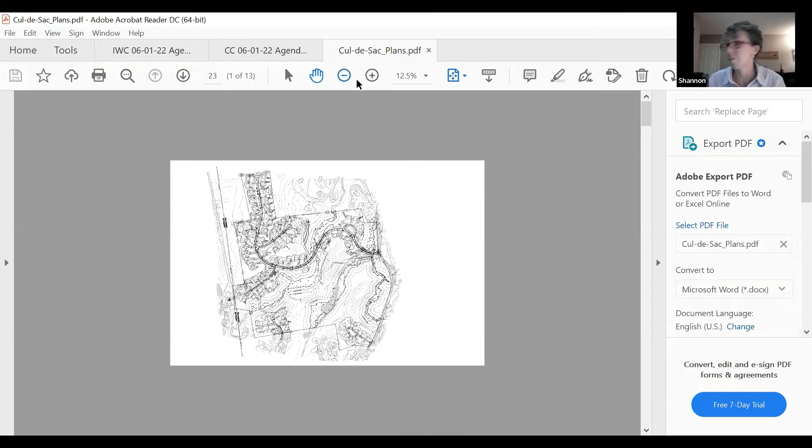Yes, so we'll be having great fun with that over the next week and a half. So hopefully we'll have that in time for the next agenda review to go out in a week and a half so that you folks have an opportunity to read it. But the decision's out. If you have any questions as you're reviewing it, I'm happy to answer any of those questions.

Shannon, I thought that the way that we had approached this, we were pretty clear as to why a feasible and prudent alternative was not required. Correct. And that's upheld with respect to the general statute. There's a nuance in the regulation, and Attorney Hollister and Attorney DiCrescenzo don't necessarily agree with the interpretation that the judge made with respect to that, but it seems it's 1 point out of 6 or 7 for the appeal.

So the idea is to go ahead and address that matter to the satisfaction of the judge, so that we can proceed. Okay. And that may be some information that's available on the 15th? Correct. So the intent is that this would be done with everything that is just within the record already. So the intent would be that it would probably be an old business item, and no need for a public hearing or reopening any hearings. Okay. So that's the intent at this point. Okay. Thank you. You're welcome.

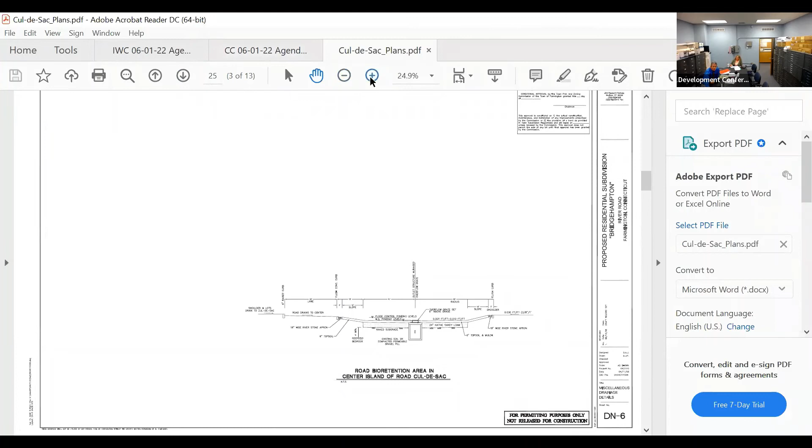The intention was this is the outsides of the cul-de-sac, and this is the center of the cul-de-sac. Everything was supposed to drain from the cul-de-sac into these areas, drain into here and infiltrate as much as possible, and then overflow into the storm drainage system. However, as you can see, this is what we're left with.

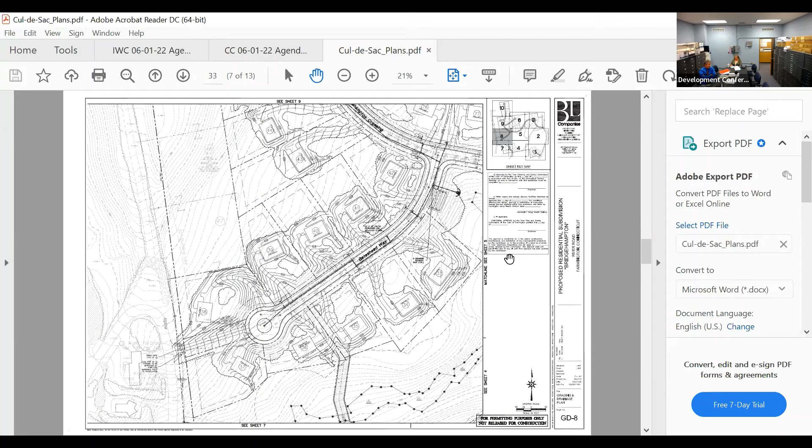Any questions? Yeah. So the purpose of that was to keep the water temperature lower, or? Well, the Unionville Brook and all that's a cold water wetland. So since the habitat thrives on the cold water, any kind of warm water would negatively affect it. So technically, on a day like this, during the summer, when the rain hits the pavement, you're going to get a drastic temperature change in the water.

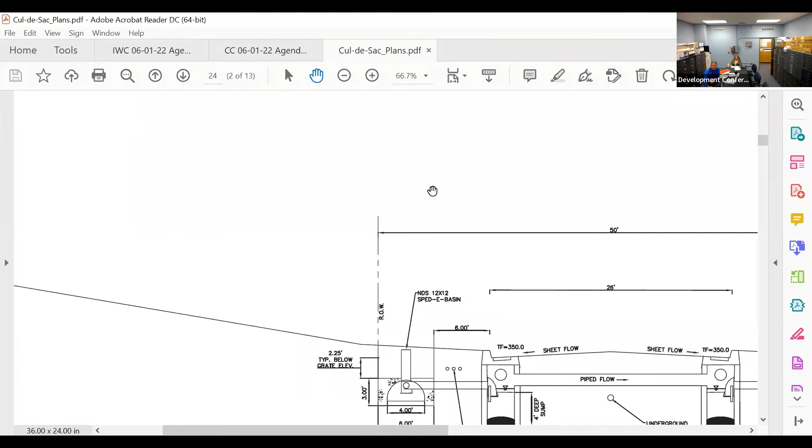So the intention of this design, and I'll show you, it picks up in here. These infiltrators are set in such a way that when the water comes in to the catch basin, it comes up and it goes into these infiltrators first. This is a little out of scale, but as the flow gets larger and larger, it then hits the pipe and then goes down Bridgehampton. So the initial 1 inch is infiltrated into the ground. Technically, that's the warm water, trying to get that to infiltrate, and then any overflow stays in the system and outlets down at the end of the line.

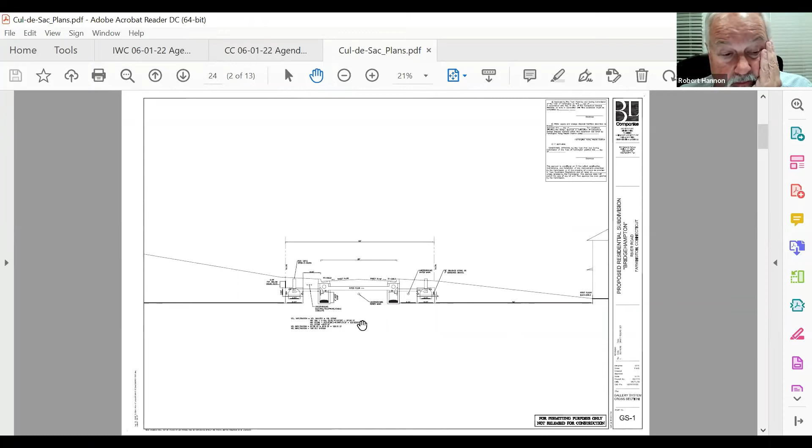Now, this is what started all the conversation about Unionville Brook and being a pristine cold water trout stream. So even some of the stuff we were talking about with that copper mine development, it's all related. I mean, this is where it first really came into view, where we took notice of the Unionville Brook. Yeah. I just don't ever remember seeing anything like this before. That the cold water, but okay.

Well, that's why most of the subdivision requires infiltration. Yeah, and it's really the whole subdivision. All the homes are required to capture the first 1 inch of rain in an infiltration system, and the road as well is designed with a system that captures the 1 inch of rain in the infiltration system. So this was kind of, as Chair Hannon said, pretty much the first time we really got pushed into the infiltration system and went hard and heavy on that.

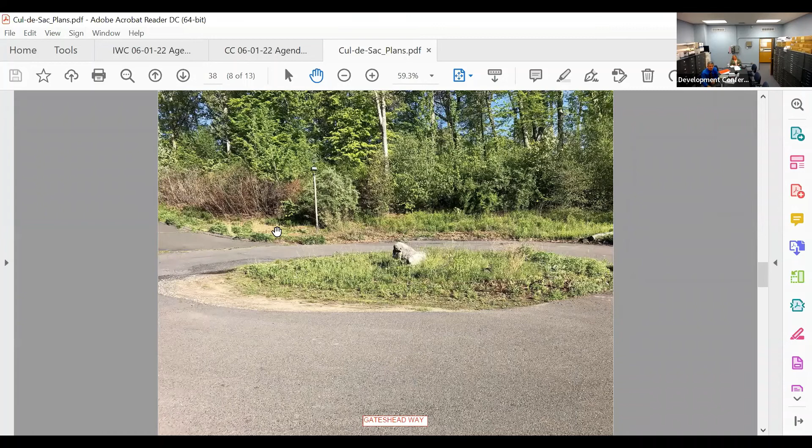But it's really not working. No, I think it's working. The whole system is working. The only part that's not working is these little areas that we're having troubles with, where cars are driving over them. And like I said, this road is more or less developed. It's been developed for quite some time, but yet the cars and the vehicles are still making the turns. It's not that they can't make it. It's just really easy to come around and make a hard corner without a curb. Without a curb, it really doesn't stop you from doing it.

And as I said, the developer had filled this in a few times. I think here, as an example, that actually hurts the system more than it helps with the amount of sediment that we keep having. There's actual fabric on here, and they keep replacing it, but it can become a potential future maintenance problem. So rather than giving them the go ahead, I said I definitely want to review it with the commission to make sure I have your backing before we move forward. Hence why I didn't want to bring this up last meeting at 11:30 at night.

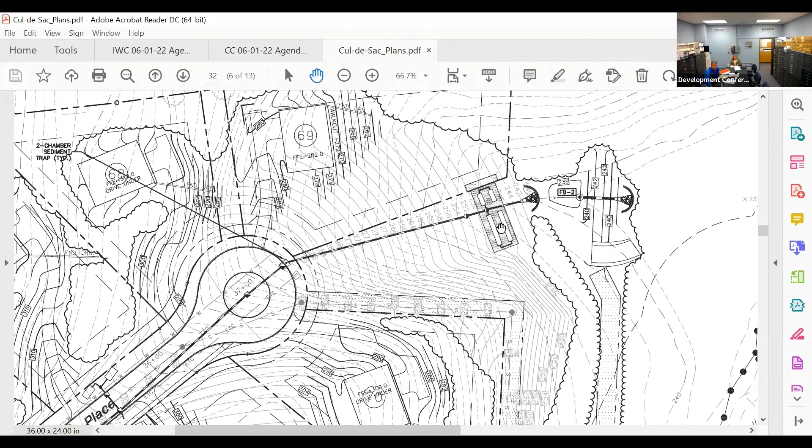So Bruce, these basins, like that one you just saw, what does that connect to? That connects over to this basin, and then goes down the hill and connects into a bed of infiltrators right here. So the main storm line comes through into here, comes into this double basin, a 2-chamber sediment trap, and then comes down into an infiltration bed here and infiltrates in. For those who may not be aware, the material on this section of site is a beautiful sand. So infiltration is not a problem. It's very great infiltration rates.

Overflow spills out into this outlet, goes into another little water quality / plunge pool area, and then as that fills up, it comes into the basin and then outlets. So it has multiple steps of both water quality and infiltration. But as you can see, this basin here is really only collecting this immediate area. And with the steep slope, it just doesn't work. On a flat lot where this is recessed into the ground, it may work, but

for example, there's no way that water's going to stay in there. It's going to come down this hill. Most of it's going to break that way, and whatever's in the middle will go through, and it's really not going to get retained in here at all because of that steep slope. So like I said, everything else is working well. I think these are just a few elements that really did not work as originally planned.

And then what would the proposal be in terms of the basins that are there? Is there a basin in every one of these? Yep. Those can be turned into a manhole. They just take the top off and convert it to a manhole, so we have access to it. I don't think it really needs to be made a manhole. I mean, a catch basin, as they have very, very limited drainage area into them.

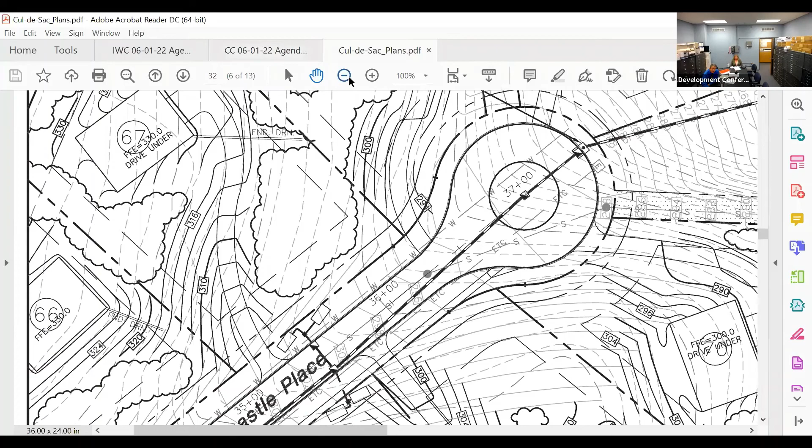Do they still have more paving to do out there, like another coat? Yes. Let me back up into the plans here, just so everybody knows. This pavement has been in place since probably 2007, most of it, then in 2008. So it's paved from here, here, and then all the way out. So all this is paved. The only part that's not paved is this right now. This is actually processed right now.

So they want to do a binder coat on here, and all of this pavement, because it's been in place for so long, and it's only a 1.5 inch binder, and it's had over 50, 60 homes constructed, and all of the associated construction vehicle traffic, it's starting to explode. If anyone's been out there, it's really starting to fail. So the intention is to mill and remove all pavement in this area, and to put a new binder course, a new finish course, and new curbs, backfill the curbs, topsoil, and seed. And then as they finish this, they'll pull out with the last final course through here and drive it all the way out, and then top dress all the streets. And we're hoping that gets done this year.

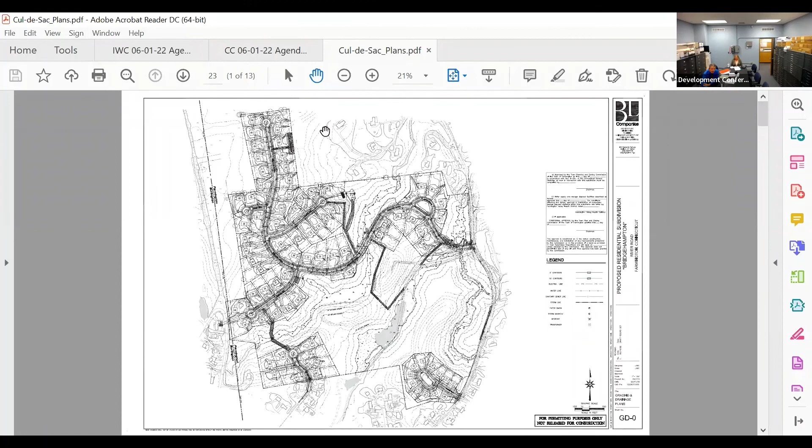That's the plan. The reason I was asking is because of a comment you made earlier, that if it was a regular catch basin, it may be graded to drain a specific way. Is that something they would be trying to do at this point in time, to direct the runoff in that area to the existing storm drainage system? Exactly. There really is not a lot of grading needed here. When you simply remove this and put some process in there, when this all gets milled out, you're really not going to change the grade much, because the road already is designed to pitch around, and a little bit will come through, but there are catch basins further down that'll pick up all the water. So I don't think it's going to be a drainage concern or an icing concern if we were to fill those in.

And the cul-de-sacs that are here, are they larger than a normal cul-de-sac that doesn't have that type of drainage? No, I don't think so. They are typically the minimum, an 80-foot diameter that we usually use. Okay. I know when we did this, we had to put the circle in there, and we had them do a turning radii template to make sure the vehicles fit. They did, but like I said, everything looked great on paper, but now that it's in place, it really is not working the way I think it was initially designed.

So, Ned, any more comments? No. Mark? No comment. Neil? No, no comment. Robert? I concur with the staff, pave it over. Dave? Yeah, I guess I do too. It seems like the system has a lot of redundancy, and this is one minor element that doesn't seem to be working. Thank you. Bobby?

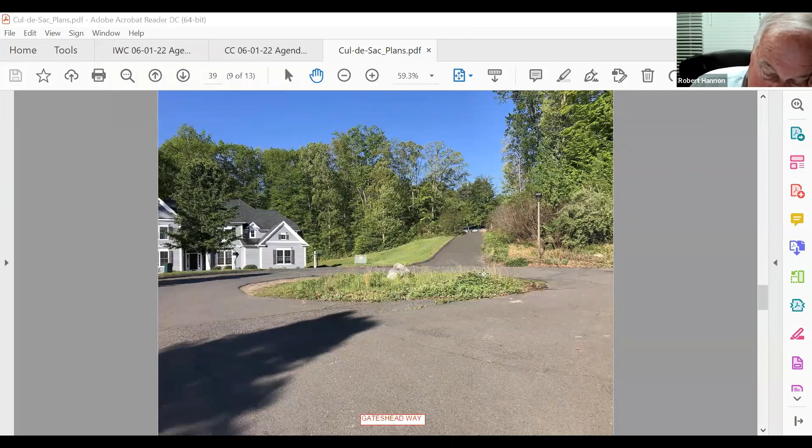And we'll open the Conservation Commission meeting at 9:30. I don't think we have anything other than approving the minutes of the May 18th, 2022 Conservation Commission meeting. Is that correct, Bruce? Yes. Can I get a motion to approve the May 18th, 2022 Conservation Commission meeting minutes? So moved by Robert. Is there a second? Second, Ned. Thank you. We have a motion to approve the minutes of May 18th, 2022. Those in favor, please signify by saying aye. Aye. Opposed, abstaining? At 9:32, we will adjourn.